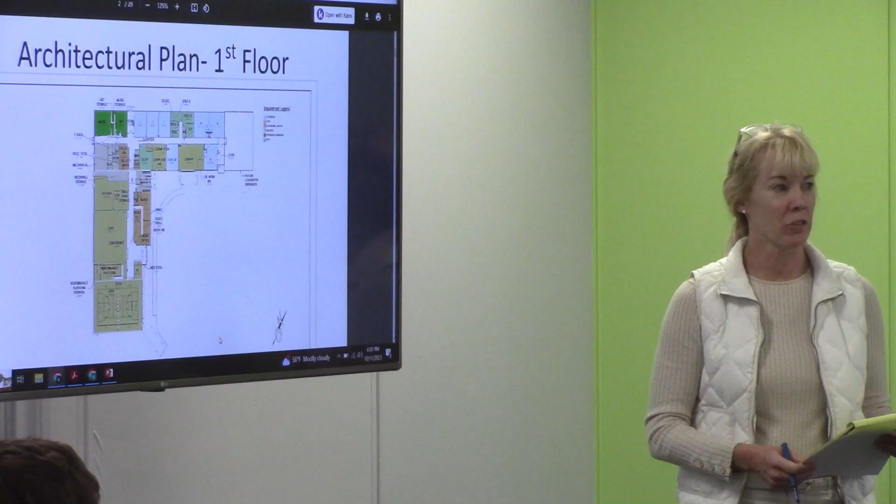Since we last met last month, we've had several engineering coordination meetings. We've coordinated with Alex and Tighe and Bond on the civil and floor plan. We've actually visited and walked the site. We visited the East Rochester School this afternoon to look at the finishes, since that was your most recent elementary school that you built. We've also had 3 staff review meetings on Thursdays in September, so we've got some valuable input from those.

So Brad's going to walk you through the updates that we've done to the plan since you last saw it. We've been evolving what I'll call the block diagram into a more refined building plan and design, putting some adjustments to things. There's been a little bit of movement in terms of the organization of the rooms downstairs, but otherwise the general organization of the building hasn't changed in the last month.

We've been keeping true to the common spaces with the gym, cafeteria, kitchen, and administration/nurse in the front area, sort of the after hours area, and the instructional classroom wing in this area. We did also increase the lobby just a tad to give a little more breathing room outside the cafeteria and gym area. That was one of the comments we heard last time.

Based on some of the stakeholder feedback from the faculty and discussions with the superintendent, we made adjustments by the library, with the sequence of rooms having the flex classroom directly adjacent to the library with a movable panel partition wall. That will lend flexibility to curriculum, with the computer lab directly adjacent to the flex room, creating a lot of opportunity for team learning. That pushed the OT/PT down closer to the corner in the main entrance area. We still have our creative arts wing, first grade and kindergarten on the end, and room for expansion at the far end.

We've also started coordinating the mechanical, electrical, plumbing, and fire protection, because we will need a fire pump. The engineers have confirmed that space is adequate, and it may have a little bit more room to spare, not a lot, but we do need a fire pump room that has a door to the exterior off the back.

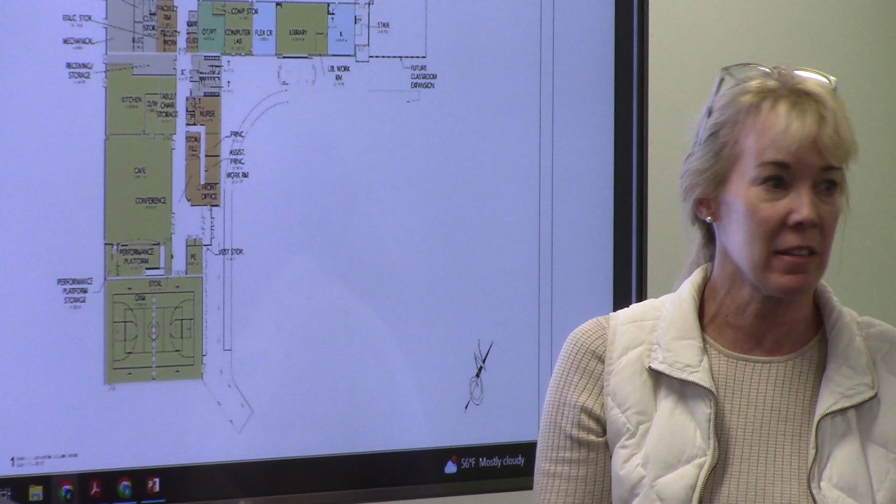Site-wise, when we get to the civil update, you'll see the parent drop-off and the 3 options we have for a nice covered canopy where students will be dropped off, then walk to the main entry or go to the play field right down here. We've also added a placeholder outside the library for an outdoor classroom, to give flexibility for indoor-outdoor use for educational functions.

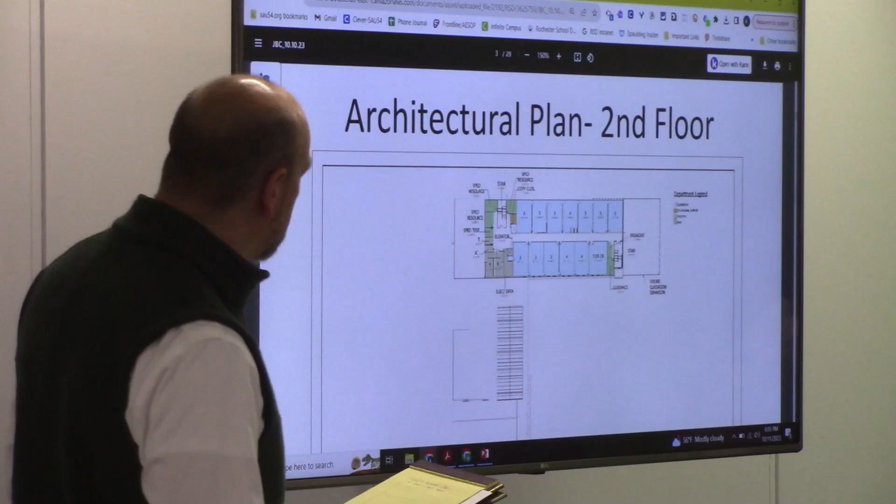The second floor is very similar. Really we're just getting into refinements here, adding more detail to the building and making sure we've got our partitions in the right place, and doors, etc. We've started to show cubbies and some cubby options, which we're going to be talking about in a few minutes. We've also started to highlight some of the exterior window areas and where they might go for daylighting.

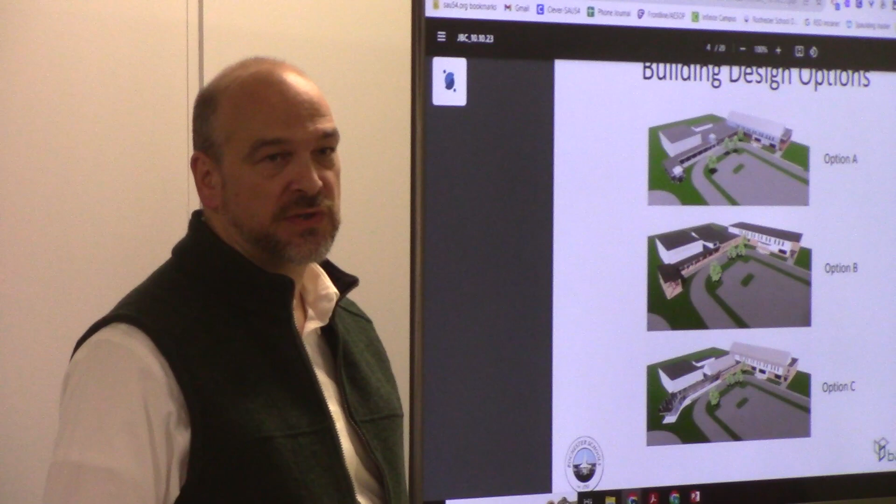So, there are a few options for you to consider for the building exterior appearance. As we turn this diagram into a building and refine it, we wanted to look at the vocabulary of the exterior, look at some different material options, and discuss those with you to get your feedback.

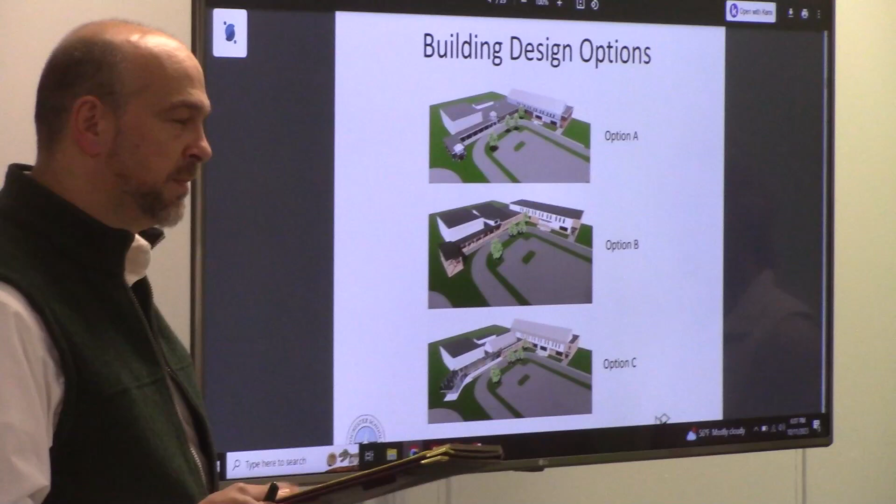We're looking at three options: a traditional one, which is option A at the top; a more timber model pitch type of design, giving a more mountain feel referencing the mountains of New Hampshire architecture; and something more contemporary as option C.

It's important that we've shown you these options to choose from, but tonight we're trying to get a direction from you, because our structural and mechanical engineers need that information to go down one path, so they're not designing three separate buildings. If at all possible, it'd be great to get a preferred direction tonight.

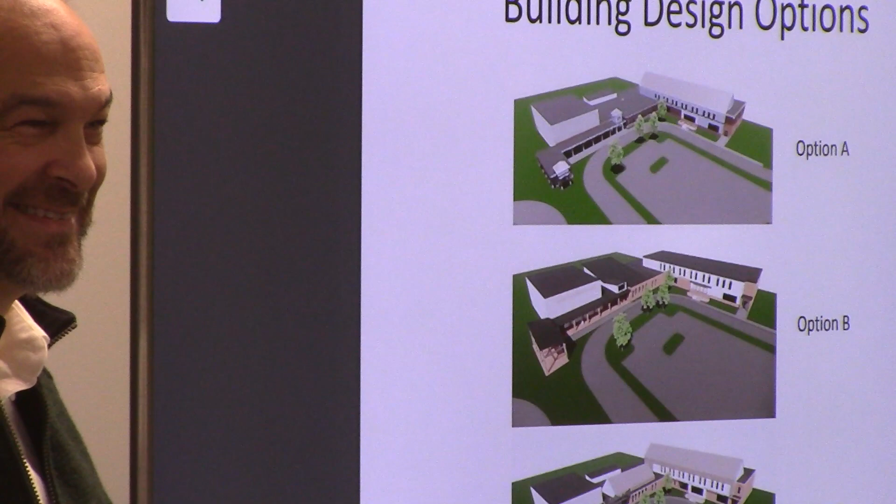And we're going to go through them more. Oh, Mark, go ahead. Yes. Yeah, we have several slides of more information. That was the overview.

Got it. So our option A, as I mentioned before, is a traditional vernacular. I'm just going to read my points, I apologize, but I don't want to miss anything important. It has a traditional New England style school reference, which is the pitched roof over the academic building.

So we have a gable end here. We were thinking that to accommodate mechanical systems, we can cut out on the backside, where you wouldn't see it, of this pitched roof to place equipment. So it sort of acts like a mansard roof or a screen, but at the same time gives that more traditional reference of a New England style building.

We're also showing, and we'll show a little later on, that there's some traditional break to this gable roof. The paneling on the side of the building is a robust, resilient metal paneling, but it has a clapboard profile to give a nice reference to something more traditional.

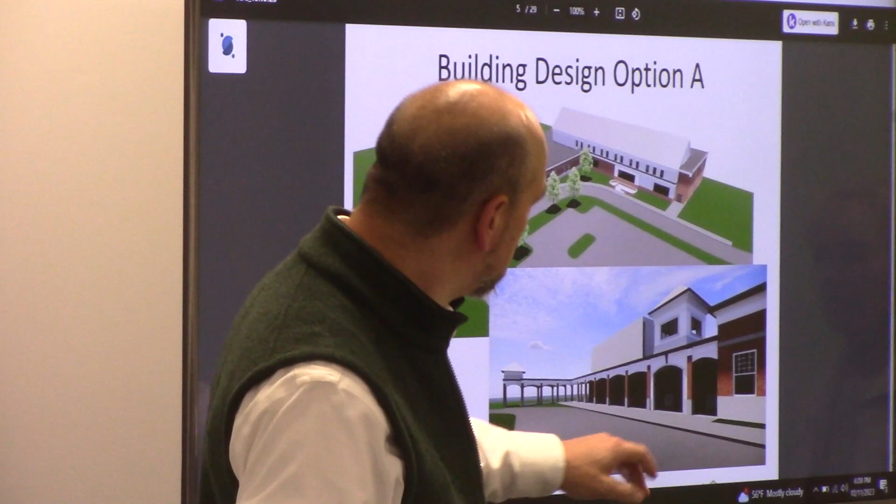Corbel brick bands down at the brick area of the building. We have precast concrete bands going across over the windows, and ground-faced CMU concrete masonry units, which have a very nice look. They're not just painted CMU like you see on the wall behind you, but have a nice ground-faced look, and they come in many different colors. A nice way to break up a building.

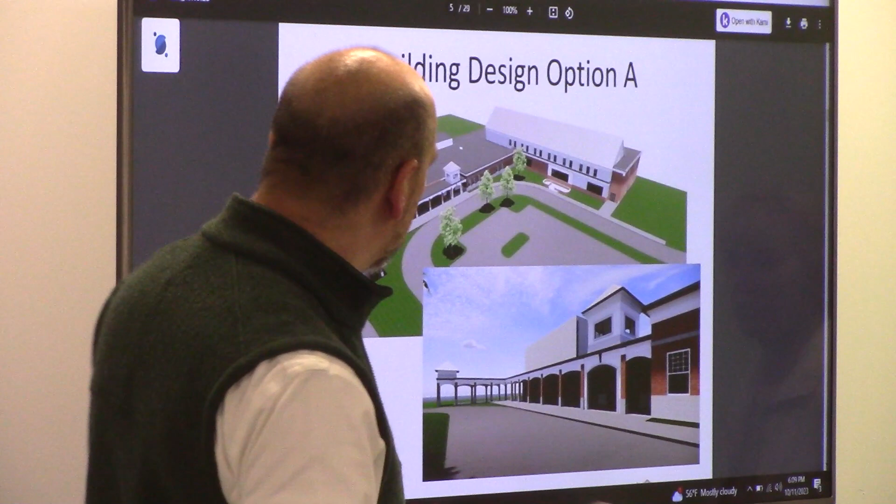We take that up to the window height. A very traditional type of double-hung window with grills at the top to break it up, and a colonnade at the front entrance, which is also very traditional. We have cupolas that signify the end of the canopy, sort of like the gateway to the school, and then a larger one that is very intuitive in signifying the entrance to the building.

These can be played around with and refined, but we wanted to try to get a general vocabulary together - a nice arched colonnade type of look with some brick piers and accents. If we go to the next slide, we'll go a little more into this option.

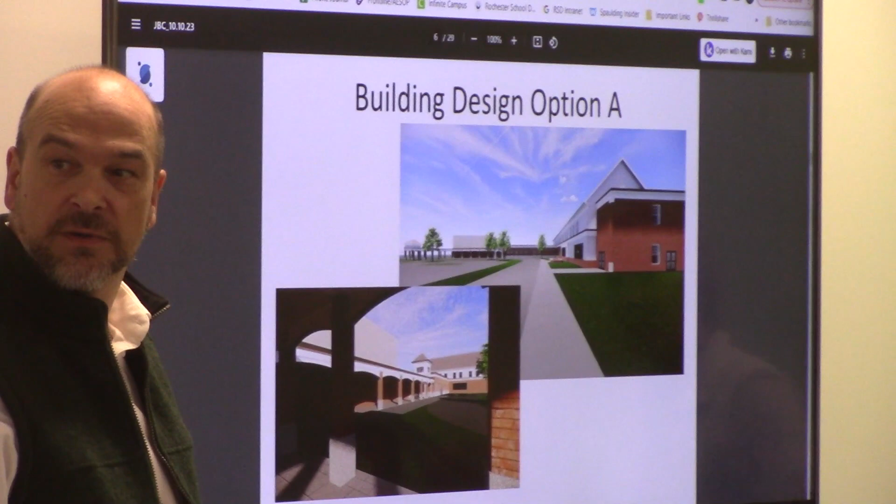Dave, could you go to the next slide for us? Yep, oh he's there, that is the next slide. There we go, sorry. So this was the end of that gable of the academic building we were talking about. The library's here, or classroom. This is the entrance with the canopy beyond. And then we're seeing a close-up here of the canopy with the colonnade, which I think is a very nice traditional approach to the building.

We're looking at a base here, which we recommend be brick where it's touching pavement, with a granite base because it's very resilient to salt. The CMU doesn't do quite as good a job, and the brick really gets deteriorated by the modern salts we use on sidewalks and roads. So that's what we're seeing here for the culinary area, but we wouldn't want to use that everywhere since it gets a little expensive.

And then the next slide, option B.

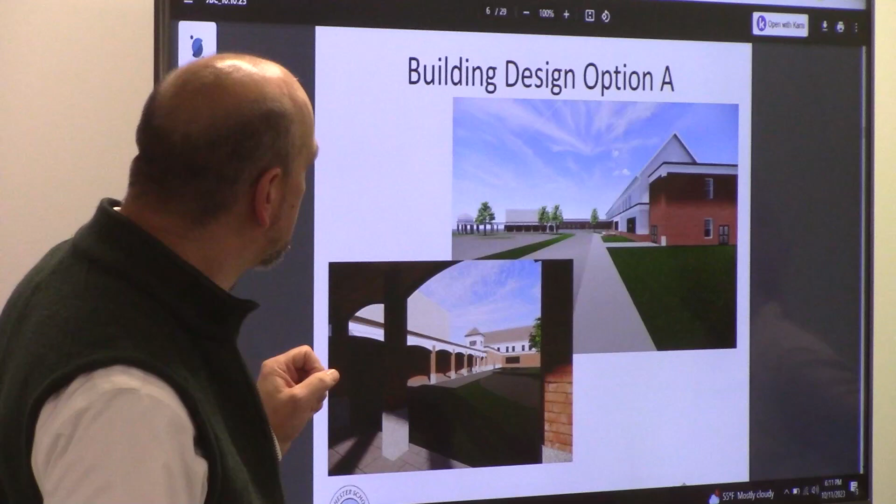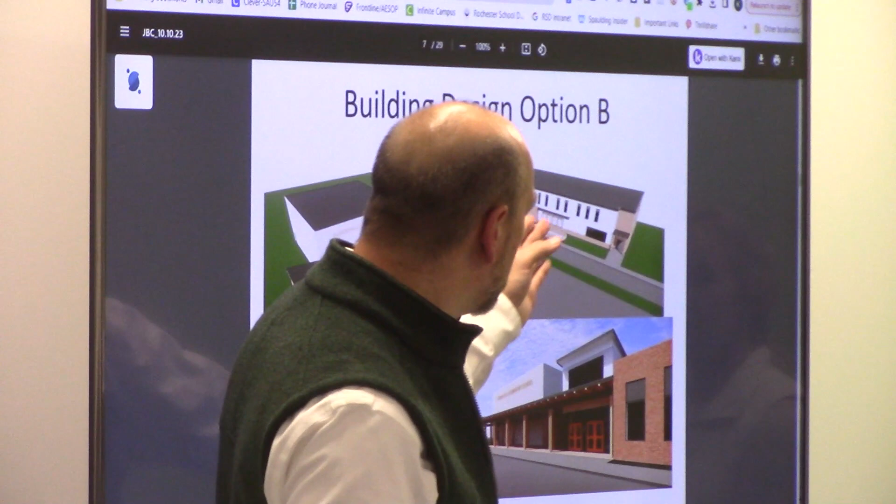Flat roof over the academic wing, so very different from our traditional look in option A. But still we're keeping some of these important elements that we talked about. All of these options have the same academic offerings and the same layout internally, so there's no real difference in that regard.

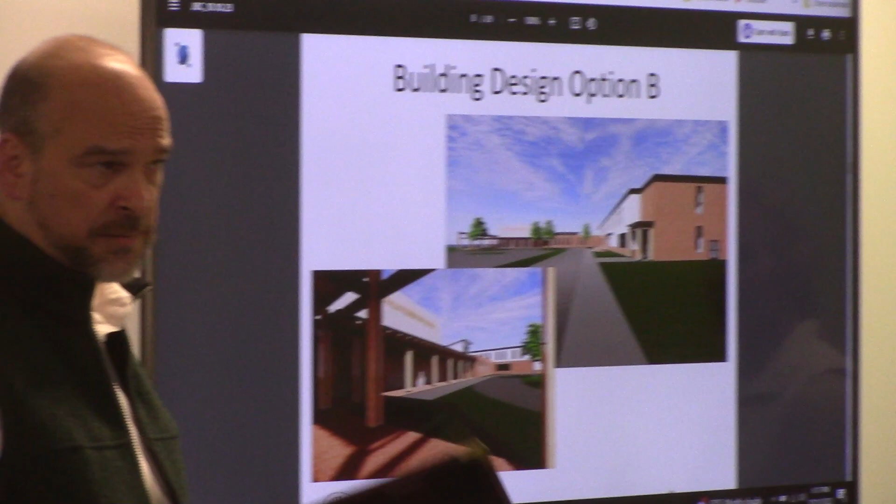So this is the look from the end of the building. You can see we've changed over from this gable roof to sort of a strong cornice look at the flat roof. And again, at the entrance with the timber columns, which require more maintenance. They're a warmer look, they can be a little more friendly with the natural woods, but at the same time, operationally, they can be a little more expensive on maintenance.

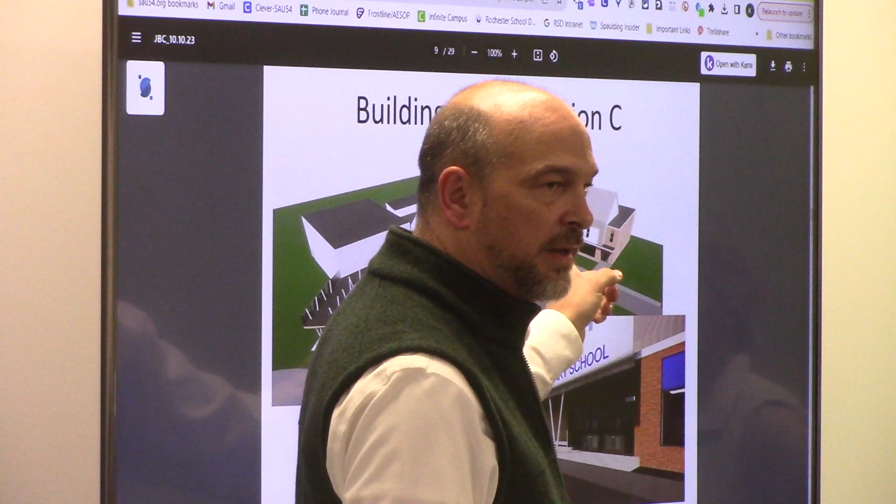Which you see some of in recent architectural design work, framing a clapboard profile metal panel system with opportunities for different colored metal panel clerestory fields above the window. So this is not transparent, it's just a different color. We can play with the colors, as in an elementary school, so it's just a fun little thing to do, but still modern lines. You can see there's still some flat roof accenting around here, and a gable roof over the administration area to kind of break up that form and make it a little more friendly.

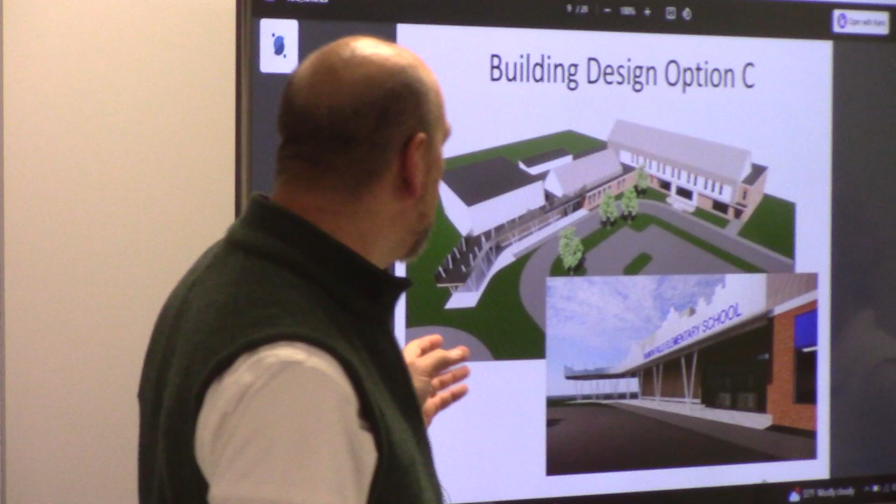Obviously the canopy really stands out. It's quite provocative with angled columns, which actually has a Nordic or Finnish reference, with a metal screen over the front of the canopy. It's a bent metal screen which is translucent and perforated, so you're actually looking through that.

Let's see what I missed here. And that's pretty much it. Oh, thanks very much, Steve. And the last slide.

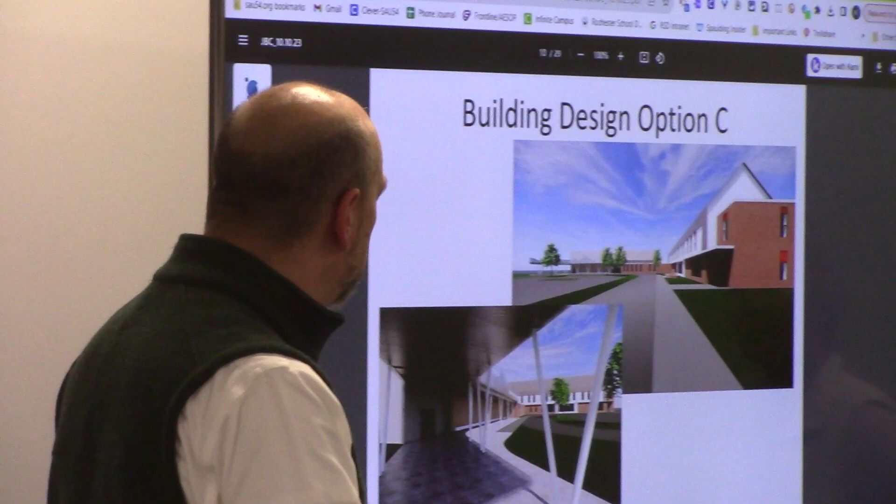Those could be changed up for a slightly more modern look, with more sleek profiles with the gable instead of traditional option A profiles. Then the colonnade is, again, very sleek looking.

We also have a stamped concrete brick patterning to the sidewalk. Wanted to try to play with it a little bit, give it a river look. It's hard to see these renderings.

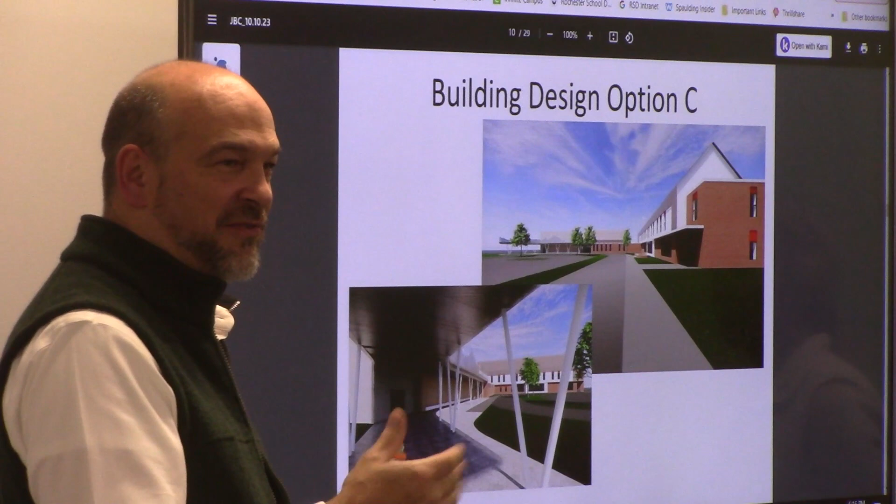Again, hard to see in the renderings, but easier to see in floor plans. We also ribboned the wall next to the walkway to reinforce the fluidity concept, Salmon Falls Road, kind of playing with that concept a little bit with a river or a stream and so forth. So the wall here actually undulates next to the walkway.

It's wood paneled right now, shown as a wood panel, but it could be multiple materials, with a bench seat in front of it. So someplace away from mom and dad, where you can actually sit down and take cover from the weather. And I think that's our last option slide.

So why don't we break there and just get some comments on, Paul? Nice job.

Couple quick things specifically for Mr. Toddy and you guys. Mr. Toddy, with the pitch of the roof in option B, do you have any concerns about that with water runoff and snow? No, I don't. The water's going to shed and we'll control that as it does, anticipated however you see fit.

And then the question for you guys is the wood timbers are very nice. Have you done that in another school? Any idea what the cost of maintenance would be on something like that? What type of wood would you think about using?

We've done it on several projects. It works best if you stain it rather than paint it. Fir is a nice, warm, beautiful wood that we like to see. It's structurally very strong, it's warm, but we could do several different mock-ups and look at the different opportunities.

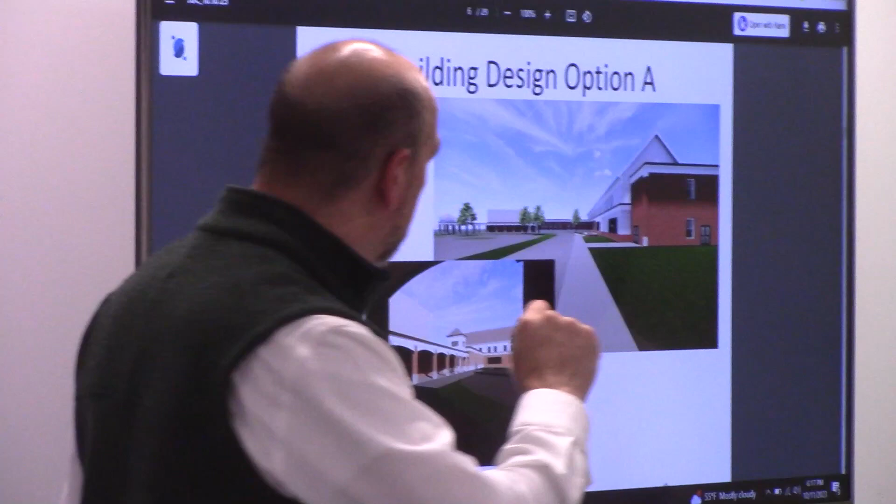And this is the perfect slide, actually, the next one. This roof here actually doesn't extend to the far side of the facade. Sorry, I was actually talking about where the kids walk, the pitch roof where the kids... but yeah.

There's a pretty wide green strip here, so we'd have a drip strip. I was more worried about the snow and water coming off the canopy, and specifically in design, the canopy would have an internal drain, as long as there's a mechanism where the snow and water was not beating against the brick or concrete.

Okay, thank you, Ingrid, sorry.

Tim? Sure, so just for practicality, is there much of a cost difference between any of the options, in building costs and then in maintenance costs? So the flat roof option, I don't know if we can go back to the slide that has all three. The flat roof option is the most conservative in terms of cost.

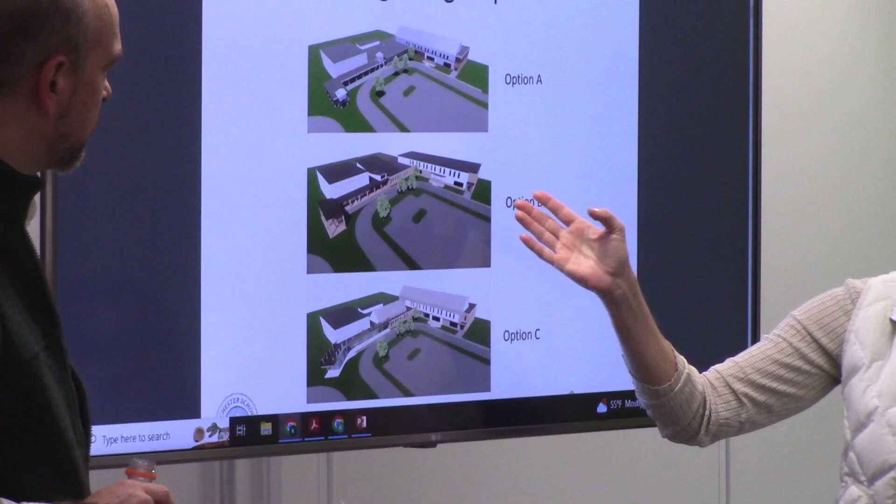And that is this one. I mean, we could go even more conservative and not have this and this, and make it all flat. That's the cheapest. You're going to have a mass for the gym anyway, to do a little bit for the cafeteria.

I mean, Harvey is here tonight. They're the construction manager and they'll be pricing this, and that will be part of why we stop in November with a design, so that they can price it up to make sure we're okay. Because if we're not okay in terms of the price, then we get to go back and change and tweak it so that we are on budget.

I would say this probably is the most expensive, just because there's a lot going on. It's not as traditional, you have more masses here. This one's kind of not too cheap, not too expensive, but right in the middle. But that being said, we can take elements from each of the designs, and if you like one thing here and this, we can come back and show a fourth option.

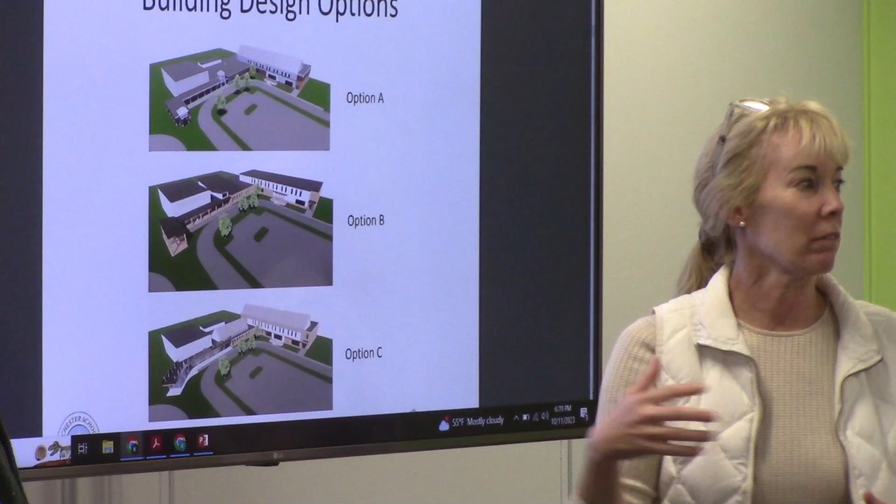And for maintenance, ongoing, 10, 15, 20 years down the road, roofs, et cetera, is there one that has a longer life?

Well, your flat membrane roof, your black roof that you see everywhere, right? The single ply, that's a 20-year roof system. Unless you want to spend a little more money and get a 30-year warranty, but frankly, the difference between a 20 and a 30-year is the piece of paper warranty that you get. The product isn't that different. Generally speaking, it's a 20-year.

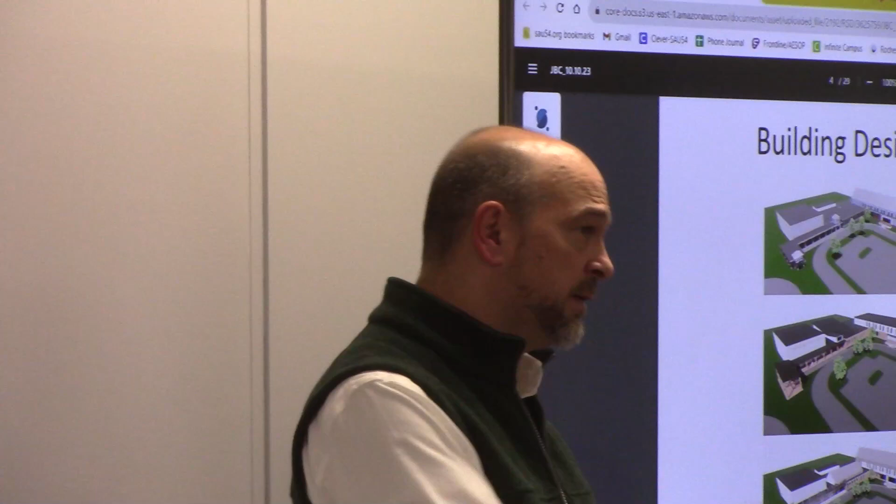Your metal roof system is a 40-year roof system. It's not necessarily the warranty, but that's what they're telling the life of the roof really is. I think there's a lot of truth behind that. Sometimes these roofs can need a little work, but it's gonna hold up a long time if you maintain it well, metal roof system.

And besides the roofs, are there any other material or design differences that cause more maintenance? Sure, so your brick, your masonries, they're gonna hold up really, really well. The granites are gonna hold up really, really well. We're talking about metal panel systems with a 22 gauge metal siding, and that's a very robust system. If you're not throwing rocks at it, it's gonna do really well. And this is a type of location that holds up quite well.

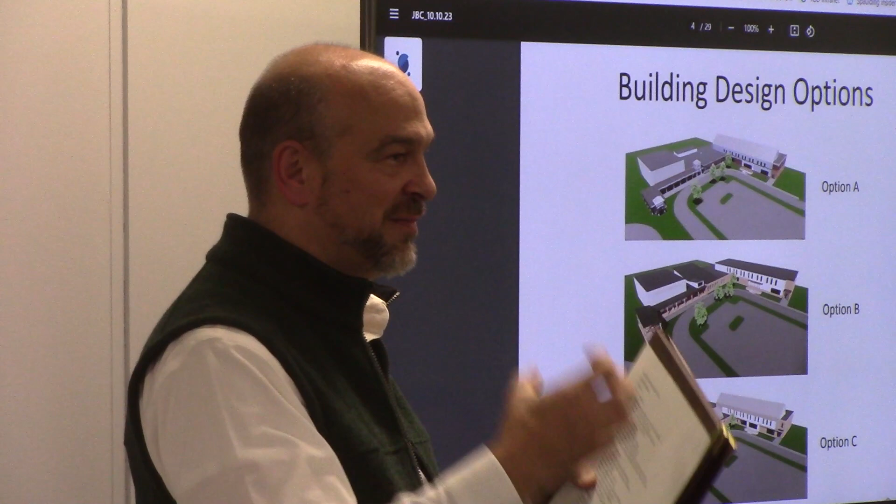The timber, on the other hand, is kind of a weak point. It needs more maintenance than the other items. Also, if you look at this third option with the metal columns hitting the ground, that's a weak point. This is a conceptual design, we would want to design in a base to that so that the column isn't actually hitting the ground. It's probably going to sit on a plinth or a column base that can resist some of the corrosive salts and so forth. So those are weak points in certain designs versus others.

But all three of these are commercial designs of their own, intended for institutional use.

Alex? I noticed that you said on option A that having the granite at the bottom of the posts helps with the harsh snow melt, which can be a problem for the brick. But on option B, the walkway looks like brick - would we have issues with snow melt on that brick walkway and on the timber? So the walkway is actually a brick walkway? You're talking about the walking surface itself? Yeah, but that's actually a precast concrete paver that looks like brick. Okay, so it's actually intended for that use. Great question.

Paul? As much as I enjoy the gable idea, I think it's very attractive. Is there a benefit to limiting the equipment exposure for us? Because we'd be sacrificing solar space, where we could put panels, to hide equipment instead. I'm just trying to understand the value there. Does that make sense? Is there a benefit to enclosing mechanical systems?

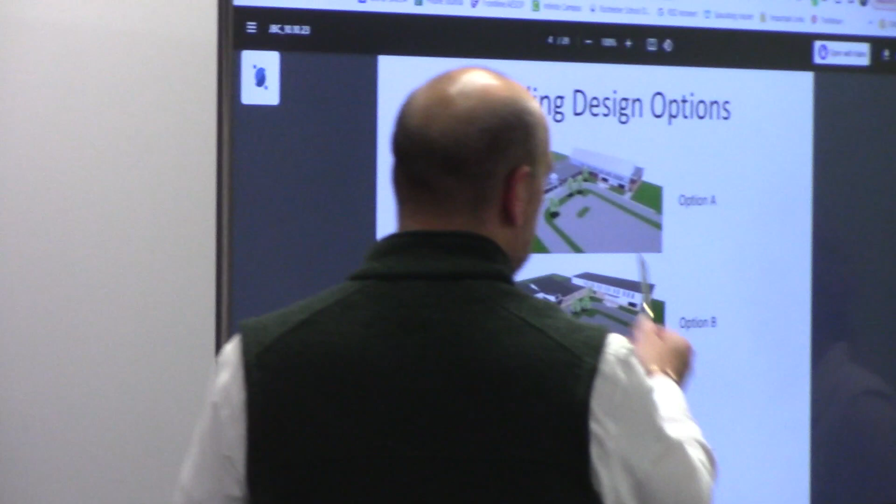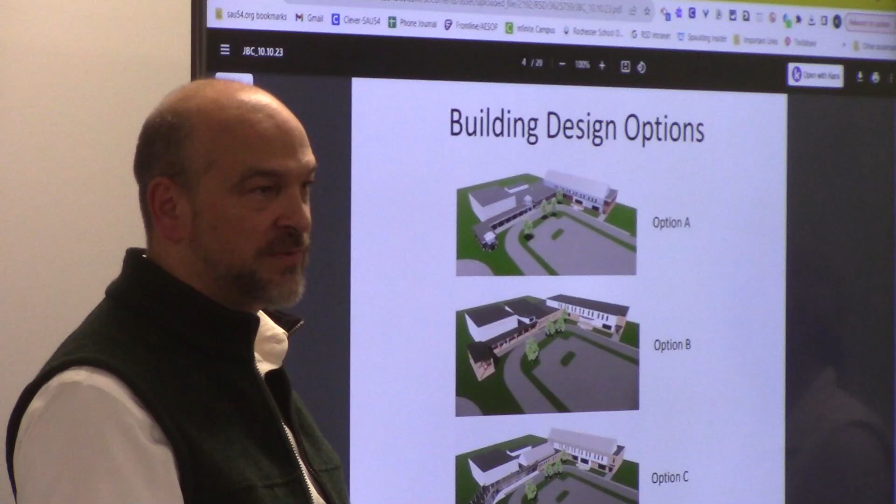In my personal opinion, this is a great opportunity for solar, actually having a pitched roof - it's a great orientation, almost southeast exposure. You have to be careful about where all the vents and mechanical systems come through the roof, but if this roof acts as a screen for that, it's actually creating a substructure for your solar system, pitched at the right angle for a solar array. Standing seam metal roofs on top of that are the perfect mounting system - they've kind of created a mounting system to clamp to, using the standing seam to clamp the panels or rails for the panels.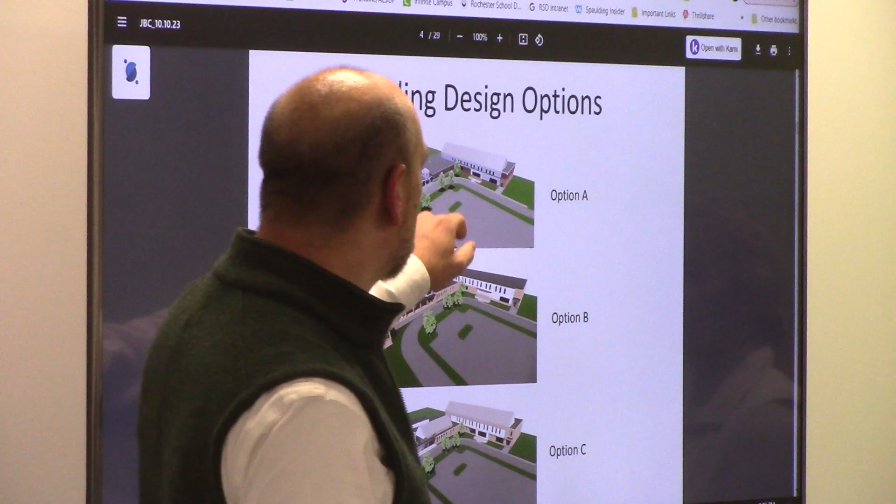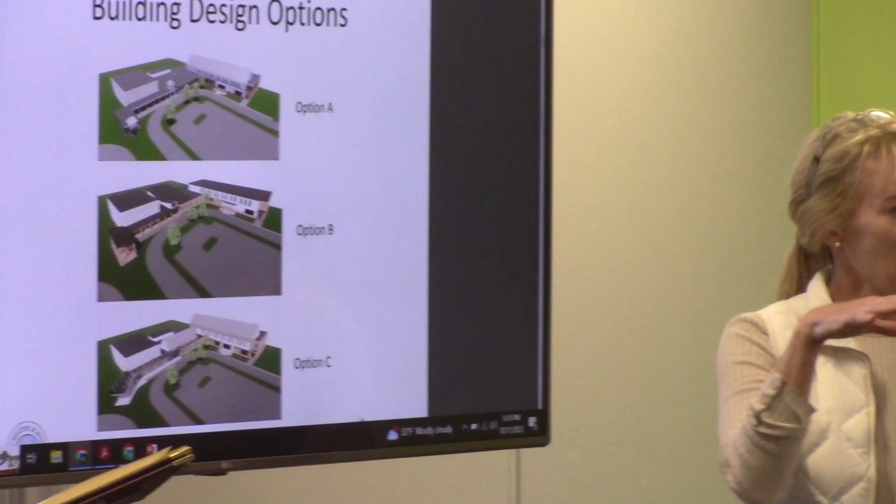We also have solar opportunities on the larger flat roofs, especially the gym, because there's no piping coming through that roof, no plumbing, not many penetrations. So we can look at solar opportunities at the gym as well as the academic wing. And Dave, earlier today we met with the engineers and had a fantastic idea for the canopy in front that the kids see - to actually make that PV, rather than build up that structure, like some covered car parks you see, do that for the canopy. So depending on which option you choose, we can further leverage those opportunities within the design.

So I really like option A for several reasons. The cupolas tie in with Salmon Falls Road, with the farms and the country road feel. I also like the aesthetics, but more importantly, on the right side of the building, having all the maintenance enclosed is respectful to our abutters who are right on that side. The more we can minimize the sound and the looks for them, being in their backyards, those things really stand out to me.

Matt? As much as Paul's not gonna like me saying this, I like option A too. I think it's a classic look. I love that tower - it draws your attention, and that's where the kids' drop-off and pickup is after school. For the same reasons I like the roofline, and I was thinking the solar panels - that's definitely a southern facing roof, so that would be perfect for solar as well. And for the noise for our neighbors, I think it's perfect.

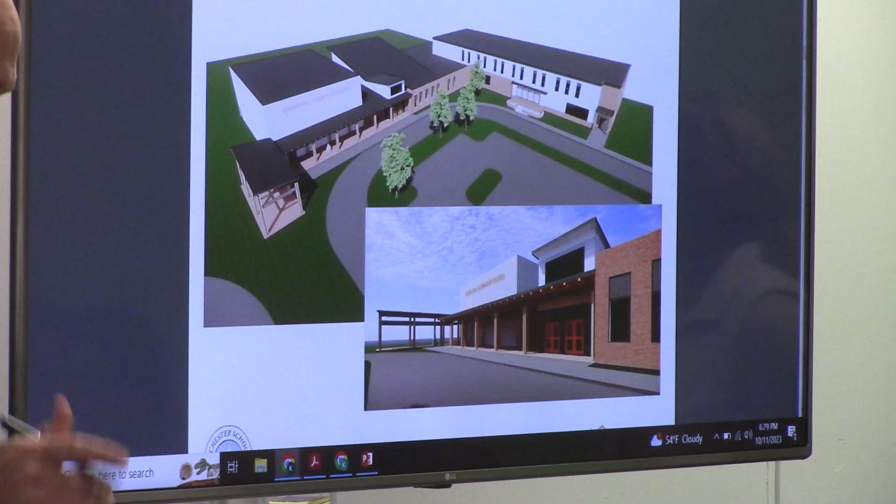And on option A, I guess my question is, what does it do on option A? Is it similar, or is it just flat? Oh, no, this is a flat roof, so it's got internal drains. And if we wanted to, could we have some sort of a facade on the roof to make it look higher? Yes, a parapet. Yes, what have you? Right, good.

Okay, Paul? I am in absolute opposition of the little pointing towers, and less in favor of the idea of putting it into the walkway. If you think about what we did at the middle school, when we had those situations, they just had points for contention and leaks. It's not functional. So you're doing it for aesthetical reasons, I understand.

I think the visual in option A is nice. I would like to see something where we put the wood on the granite, I like the wood to warm it up. The river ball thing sounds brilliant, I love that you can tie those two together. I personally like C the best, but I'm a more contemporary kind of guy. I get why that's not a draw for educators, but the cupolas, to me you're just adding things that we have to take care of later for a visual that's not going to be long-term driven. It's just not, I don't see value in that.

Matt? So I do also like option C out of this. The contemporary feel is better, in my opinion. There's, to me, more of a timeless look of this school. It also goes with more of a tech-centered, one-to-one district that we are. The problem I do have with the cupolas is, number one, I just think of Tri-City Plaza, I think of a mall, I don't think of an education space. And it gives me a Garrison City feel, which we're not over, so I'm not going there.

We were just trying to give you different options. I'm a fan of stamped concrete, so you can make it look however you want, and it's good and durable.

I think the way this was drawn, it doesn't corner us into any decision. It's really up to you. The way it was drawn is a more traditional sidewalk. It looks like there might be some stamped concrete patterns in it, but you could go with a regular concrete sidewalk. It's really the owner's choice.

I like A for the reason that others have described already. I think it fits in with that neighborhood.

What's your take on the argument that the cupolas will leak? Have you seen that in the buildings that you put them into? So these cupolas are actually outside. If it's built right, they shouldn't leak.

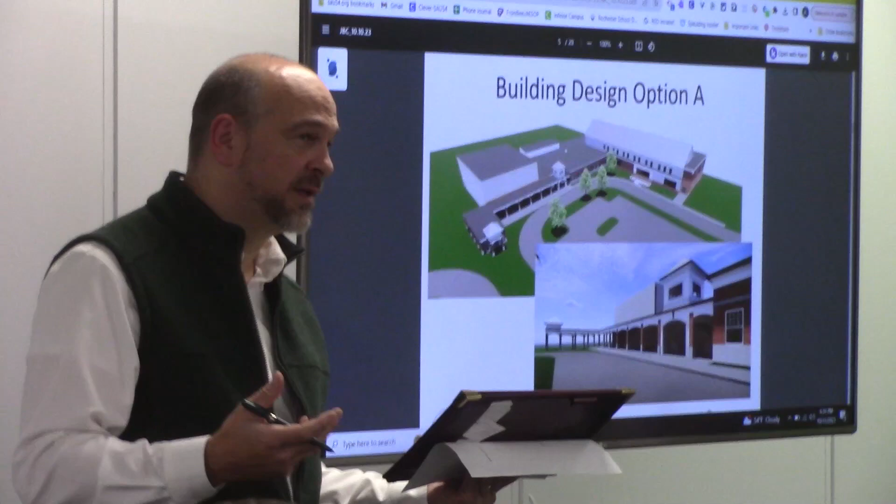Our vision for the cupolas is that it's kind of identification with the main entrances. It's trying to fit in with the concept of the metal panel roof, which is supposed to be an homage to the New England barn, the New England house sort of thing. We can very much go in that direction with these cupolas too.

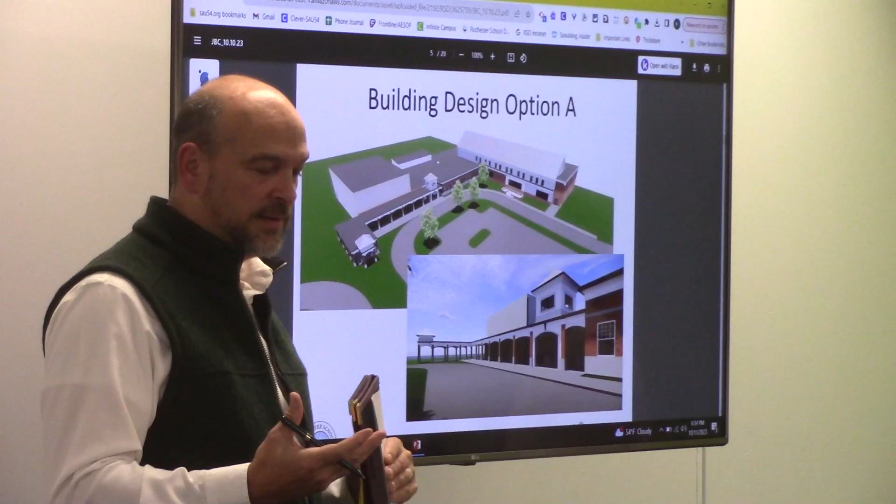So the cupola roof, there's no reason why it should leak. The paneling on the sides, we were envisioning a fiber cement metal panel system. It's not something that's wood and porous per se, but something that would be a little more resilient, though we could still apply some character to it with moldings and so forth.

We have not put any skylights in the building because we've designed it so it can be daylit from both sides, so you don't have internal spaces without light. We put toilet rooms and things like that in the corners. Skylights are something we typically try to encourage, but we know eventually they do leak.

So I think we're okay, but I'm hearing we may need to study this a bit more, these canopies and these elements, to maybe make them a little more modern, but still respect the farmhouse feel, the neighbors, the sound, and the mechanicals.

If this is the direction we're going, my pet peeve is when you go to any commercial zone and they have this type of cupola, you look up and you've got cobwebs, there's a pigeon in there, and all this other random stuff happens. Some kid flings something that gets stuck up there, and they're laughing every day they come in. What do we need?

Maybe metal screening that you can put in to keep bees and birds out, and stuff like that from happening. There's a lot of maintenance in that high-up space. That's a staff injury situation unless we need more boom lifts. We have one. I said more.

It's a really good point, and there's some subplot things to talk about. I do a lot of building assessments for schools, and where the repointing of the brick has to happen more often is always down low next to the pavement. It's kind of a pet peeve of mine - English is probably tired of hearing me say it at this point.

Also, the cost of masons isn't cheap, so we try to spend that money where it does us the most good. The ground-faced CMU for the wainscot means less joints, less units - I see some nodding over here - so less labor, so less money. We try to put the money where you're going to get the biggest bang for your buck.

That's kind of why you're seeing these accents. You're seeing the precast concrete here, a little more money - probably on par with the brick. I don't want to put you on the spot, but we think we're in that neighborhood. It gives a nice accent where we're going to see it most - we're not going to do it everywhere, but in the upfront portions where it's really prominent.

As I'm trying to listen to you all, I'm getting a sense that everybody likes - we're getting a consensus of A. But do I get a consensus of A without the gazebos? Does that take care of both, without the cupolas? Yeah, I think that's going to be a debate back and forth for a while. Okay, so we're not going to solve that right now.

All right, so we have some classroom layouts to look at. We also have some cafeteria tables, so I know we're 45 minutes already, so I'm not going to read all of these. They're in your handouts, but this is kind of our dream futuristic classroom that we've developed. So it has biophilic design, it has technology, flexible learning environments, healthy learning environments for the different types of materials.

As well as environmental controls for the classroom. So all of these things are in our minds architecturally as well as with our engineers as we're moving forward. And the next slide. So we've been looking at the classroom layouts and trying to refine the inside of the building and the guts of the building. So we're getting into this layer now.

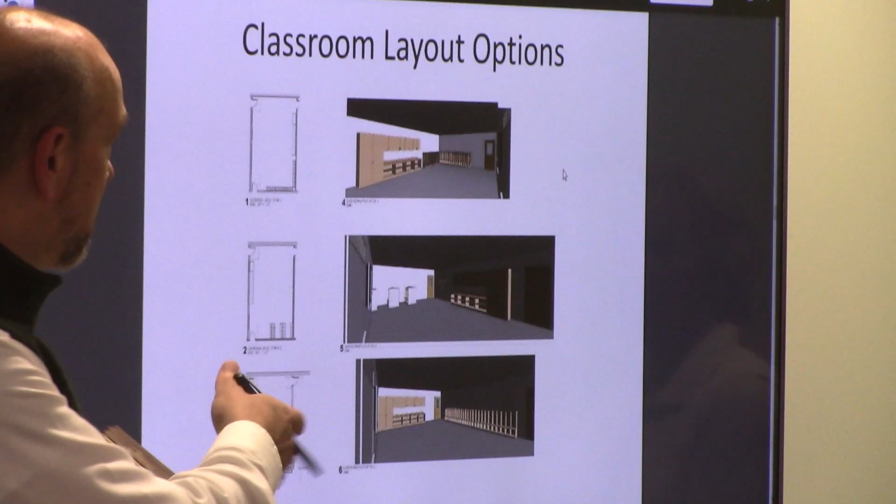Today we had a wonderful tour of the East Rochester School, your most recent school, and a terrific conversation with the principal over there about what she likes and doesn't like about the building. So we've learned some things since we put this slide presentation together, but what we brought to you was our thinking yesterday, and we had a few options. Now we have a fourth option to discuss, which is what we learned today.

So this is just the intro slide. The next slide would be the first option we were looking at, which was every classroom to have essentially a countertop, a 12-foot countertop with what we call a t-shirt wardrobe. This can be just storage with shelves, or half of it's shelves and half of it's a hanger. And then over cabinets from 12 feet.

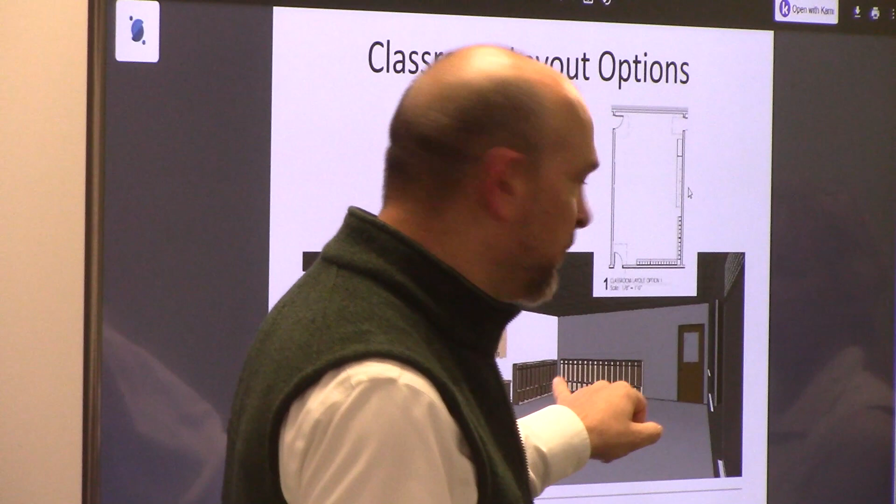And then we're shooting for 25 student capacity per classroom. That's your maximum capacity in the classroom. So we're shooting for 25 cubbies, so that we can accommodate the largest number of students that might be in there.

We've looked at all of your schools. We've been in all the school buildings. A lot of the schools have the hooks or the cubbies in the classroom. East Rochester does not. But talking about them in the classroom for the moment.

This design has it so that when you walk in the door of the classroom, the cubbies basically are along this wall, the corridor wall as it were, and then it wraps the corner here, the idea being that they come in and they're changing their boots into their shoes and they're taking their coats off, and this is kind of the changing area or zone in the classroom, and then they're walking through their academic experience.

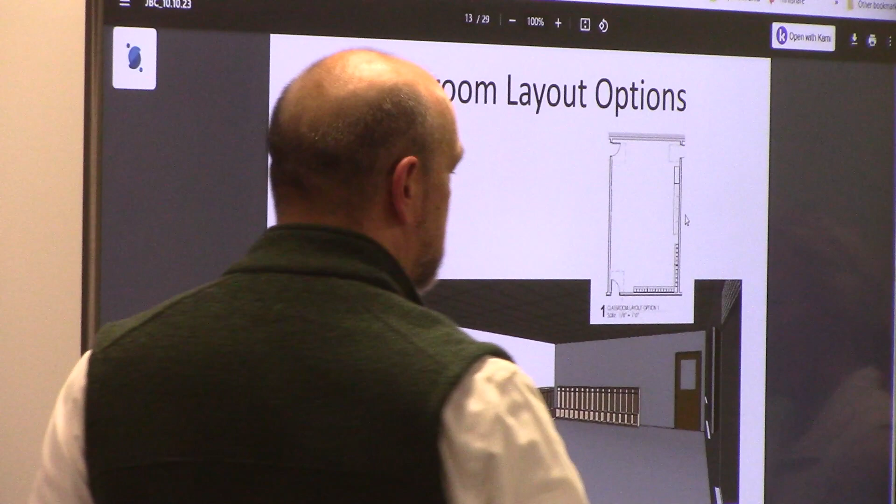The next slide, I'm going to go through these and we can go back. You're coming into the classroom, but it's sort of a corral arrangement where you have these aisles of cubbies. And by the way, we've done schools with all three of these options, so we don't have a favorite. It's really about how you guys want to work through the school day with the children.

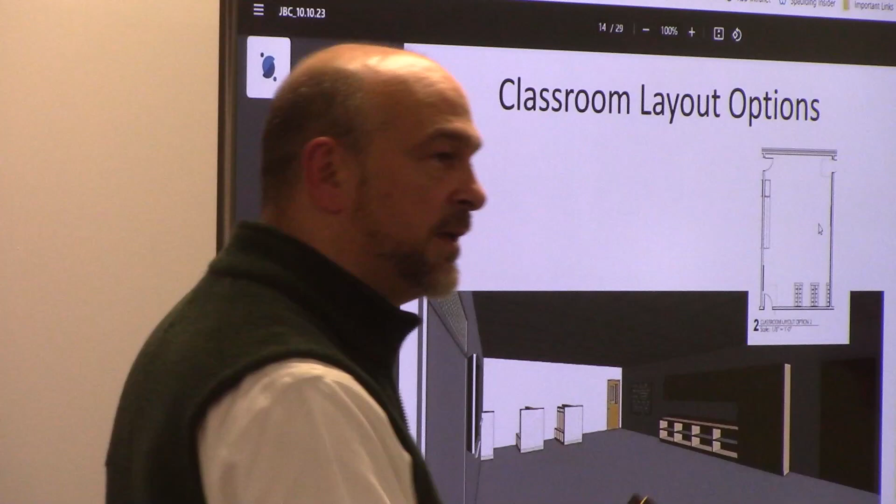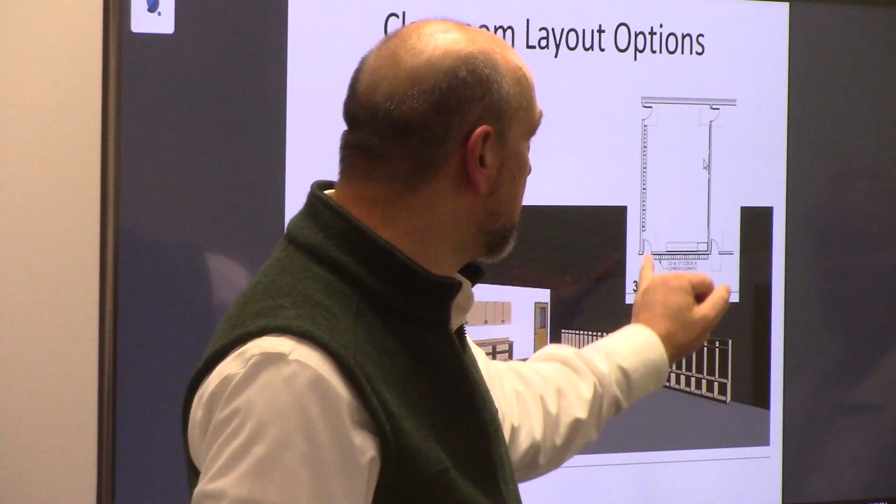But it's sort of a half-height wall here with aisles for the cubbies, and then the same amount of cabinets and wardrobe along one side with the visual display, the marker boards and so forth, or the instructional wall being on the opposite side. The third option is you come into the classroom, you still have the display or instructional wall on the opposite side of the door, but your zone for changing from your coats and your boots are all along the opposite wall. And your counters and your wardrobe are on the corridor, opposite corridor.

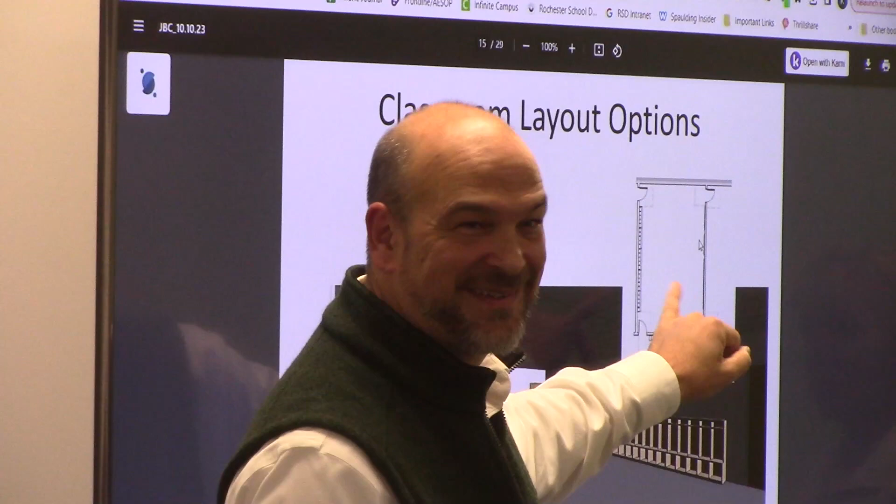So right as you walk in, which is the way that it looks in East Rochester, they've got all of their millwork right up against that corridor wall. But in East Rochester, the cubbies, of course, are not in the classroom. They're in the corridor, and they really like it. They like it a lot.

Next down the corridor a little bit, you've got 6 feet of clearance between those cubbies walking down that corridor. But they say they're very comfortable with it. It works for them. They have fewer classrooms per corridor than your new school does, so we have to keep that in mind as there's more students traveling through this school.

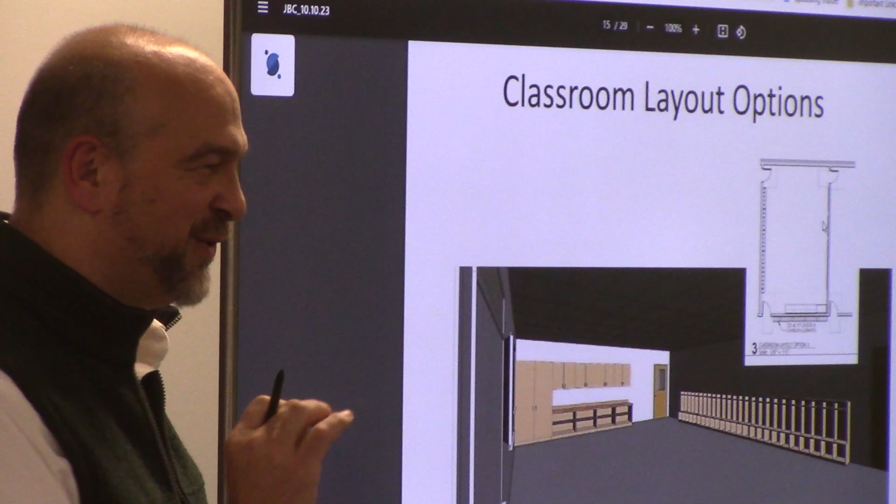But they're very comfortable with it. So their preference is actually to have the cubbies in the corridor for a few reasons. It was really interesting to hear the principal talk. One was, I never would have thought of this, but when Jenny gets out of mom and dad's car and her clothes smell like cigarette smoke, and they put it on the hook in the corridor, not in the classroom, they don't smell it at all, which was kind of interesting.

The other one is if Joey has a disciplinary problem and he needs to go home, the principal can go get his things and never disturbs the class. So everything stays outside the classroom. Was there another reason? No. So those were pretty enlightening preferences that we heard.

So we're kind of looking for some direction as to which way you'd like us to organize this feature. Matt and then Paul. I'm glad you heard from the teachers, because that was my concern. I mean, we can sit here all day and talk about it, but we're not the ones teaching in the elementary classroom and whatnot. So I'm glad to hear what their preference is, at least the principal and whatnot.

I guess the way I look at it is if it's in the classroom, it takes up space, whether it's the corrals or whether it's the long line of them. That does take up space in the classroom that could be used for something else, some other instructional purpose. So I would be leaning towards having it in the hallway myself.

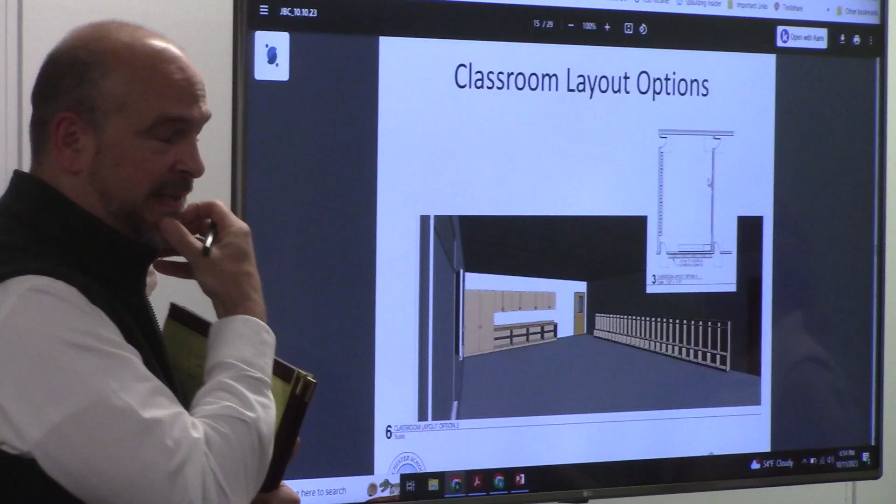I don't want to cut anybody off from the cubby discussion. There's a second half of this, which is the casework inside itself. At East Rochester, we were talking to the principal about the casework, and it was interesting to hear her say that there's never enough storage. So we would put 30 linear feet of storage in here, and it still wouldn't be enough. There's just never enough, right?

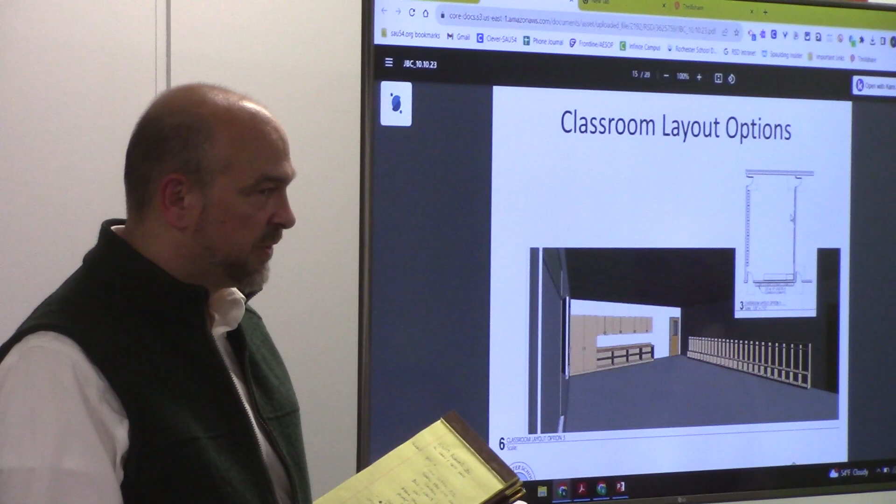Traditionally, we're used to doing most of our schools with a 12-foot counter, 12 linear feet of counter with over cabinets like this, with a wardrobe that's 4 feet wide, so two 2-foot doors. In East Rochester, you've got probably about 18 feet of cabinet work, which is quite a bit and can get kind of expensive. The arrangement is very similar to this, the only difference really being that the wardrobe looks like a 3-foot wardrobe instead of a 4. Otherwise the overall length is a good 6 feet longer, or 50% bigger than what we're used to putting in.

So we are kind of wondering if you want to go in that direction, or you'd like to stick to something more.

Matt, go ahead. Mr. Toddy, do we have a concern with the floor, where we go underneath these, do we want to spec out when the floor goes up to it? Yeah, I would think the floor would just need to go up to it. I wouldn't worry too much about putting it underneath.

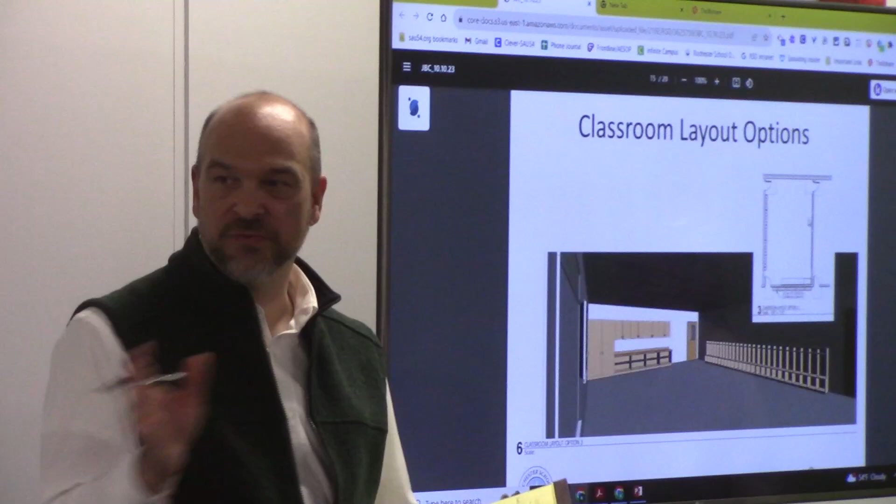I also wouldn't worry about the built-ins too much. The classrooms at East Rochester are a little oversized. I think these rooms are a little smaller than those. Your East Rochester rooms are running about 925, 924 square feet. We sized these, I won't say lean, I'd say compliant - we didn't oversize this building, so it's right-sized, about 905 right now. That 20 square feet can mean something when you start getting into these kinds of discussions.

So what we did at East Rochester is we had the built-ins, which we've all agreed is never enough. So in the furniture lines, which are owner's costs, we put shelving, closed doors with locks on wheels - at least 2 per classroom. Those are very moveable, so we can add or move storage without having to have the built-ins. You can get much cheaper storage through those types of armoires on wheels, I guess you'd call them.

I would be more in favor of sticking with the design and adding another cabinet, not a wardrobe, but a similar size cabinet with all shelving inside. If we're gonna do this, keep the aesthetics similar, and no teacher would argue against having another cabinet. Matt, do you agree? I definitely agree with that.

I don't know if you have a similar layout in your classroom. I work in a building less than 2 years old, and I have 3 of those tall cabinets, all about 2 feet wide. I only bring 1 coat to school, so having 2 feet for 1 coat is a lot of wasted space. If there's a way to make that smaller with more shelf space, that would be more practical for a teacher.

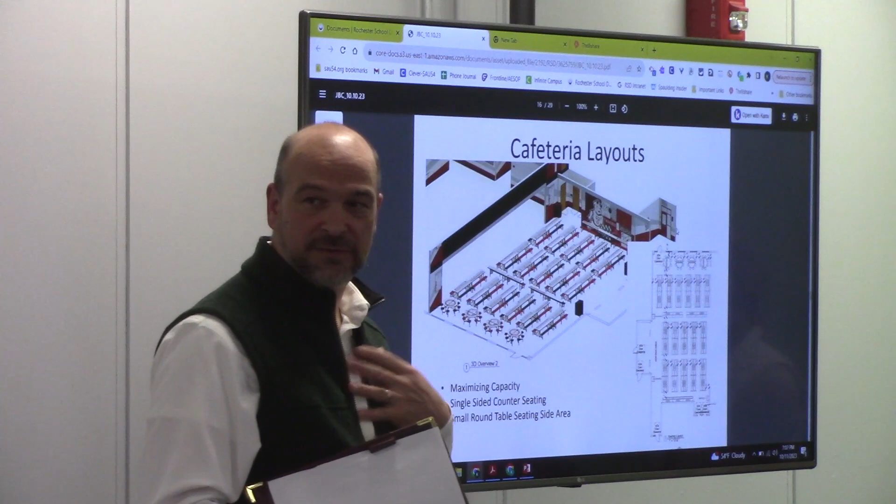We brought along a few examples of different cafeteria type arrangements. This is more of a furniture discussion which I'm sure will be ongoing. We understand you guys have a preference for long rectangular tables, a more traditional arrangement, but we brought examples of what's being done out there - these images came from one of the vendors you use, so I'm sure they'll come in to talk more about it. This is a maximum density layout, and with the rectangular tables it does allow for a side area for round, more communal type tables.

This particular one, even though it's an elementary school, it's kind of high schoolish, because it has this counter area where you can sit only on one side, for the kid who doesn't really want to sit with anybody else, which is kind of interesting.

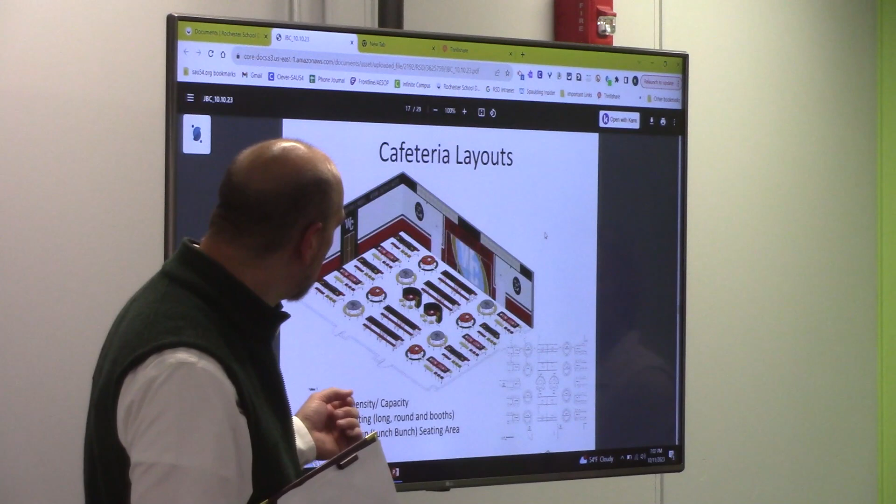The next arrangement is more of a mix. You have these rectangular tables, and even though they're kind of rigid shaped, they're still essentially rectangular tables. They have round, more communal tables breaking it up. And then this is essentially a booth in the center, just a different way to break things out. We're hearing from schools that they'd like to have some options of semi-enclosed spaces.

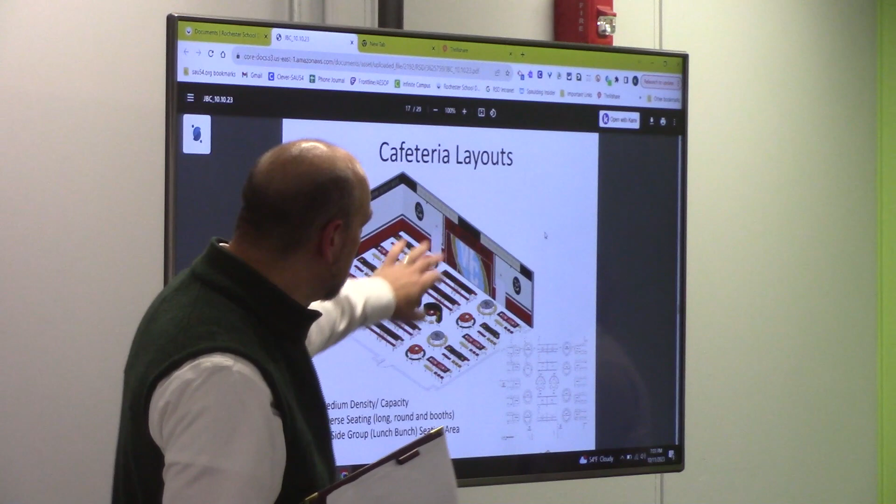Or at least spaces for the students to eat in a more enclosed or side area. One of the schools I work with calls it the lunch bunch, which I just love the term, but it's basically for the kids who need a slightly more intimate environment to eat, instead of a whole separate room that completely segregates them.

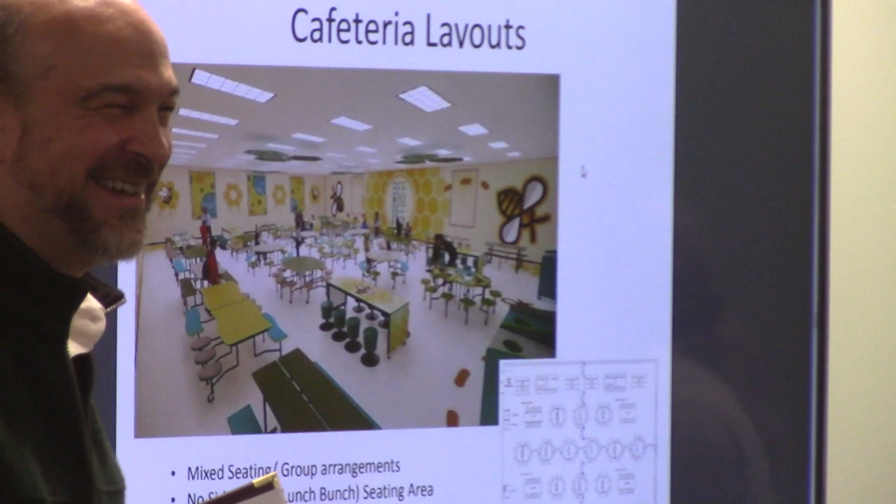And then the last option is really fun, but you can tell this was drawn by a furniture vendor. There's a lot of different types of furniture here, it has everything. So as we continue to push forward looking at the furniture options, we wanted you to start with the gears turning about these things, because we're going to be talking more about furniture as Gordon is engaging with furniture vendors.

Paul: My question is for Mr. Toddy and Mr. Pusey. Looking at the cafeteria layouts, the first one reminds me more of the middle school type setup, and the second one reminds me more of the high school type setup. Could you find out which works better for the staff and students at each, so we understand this before embracing it? I understand why the square tables, that's what we have everywhere, it makes sense. The high school, I don't know how long we've had that furniture there, but it's been a little while. So can we find out from them if it's been beneficial for the students, one versus the other?

Sure. Plus and minus? Sure, that'd be great. Thank you. They're different ages though. This is high school, but it's still elementary school. I agree, and I don't mean from... I'm talking from a functionality standpoint. Does it work with those pieces of furniture or not? That's what I'm looking for.

Matt: I guess if you could add to the list of questions, I don't know whether in elementary schools the classrooms eat together, or is it a free-for-all where they can sit wherever they want? I don't work in an elementary school, so I don't know. It might be more functional if it's easier for a class to sit in one spot versus a free-for-all throughout the cafeteria wherever they want to eat.

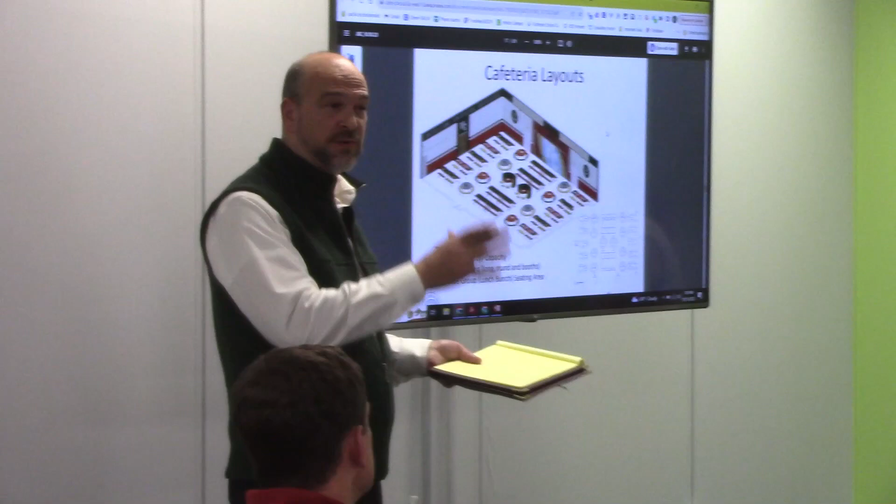I would propose that this is a larger discussion because you're talking about equity and consistency throughout all the schools, and it's really a much larger discussion than just the one school. You're going to be heading down this road of doing layouts, asking the furniture vendor to lay something out based upon how you'd like to do it in all of the schools. So we just wanted to promote some dialogue about that and give you a chance to think about it as you move further down the line.

All right, so next steps - obviously we're going to refine our building elevations and the 3D model that we have. We're going to continue to meet with mechanical, electrical, plumbing, and review sustainability items. They will be here at November's meeting to present their designs, like we've done with the site and the architecture. We're laying out the structural grid, and now that we have the massing set from tonight, we'll be able to have a preliminary design for structural members. We've started to talk to Harvey on what is most cost effective.

And we're just continuing to develop those documents. I think the 12th of November is our deadline so that we can meet an estimate provided to you for the December meeting. And we're going to start outline specs for materials, finishes, flooring, cabinets, etc.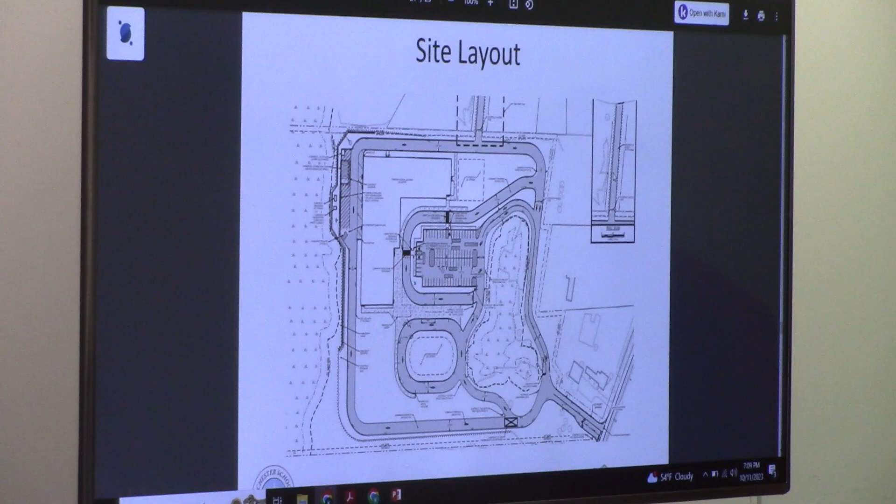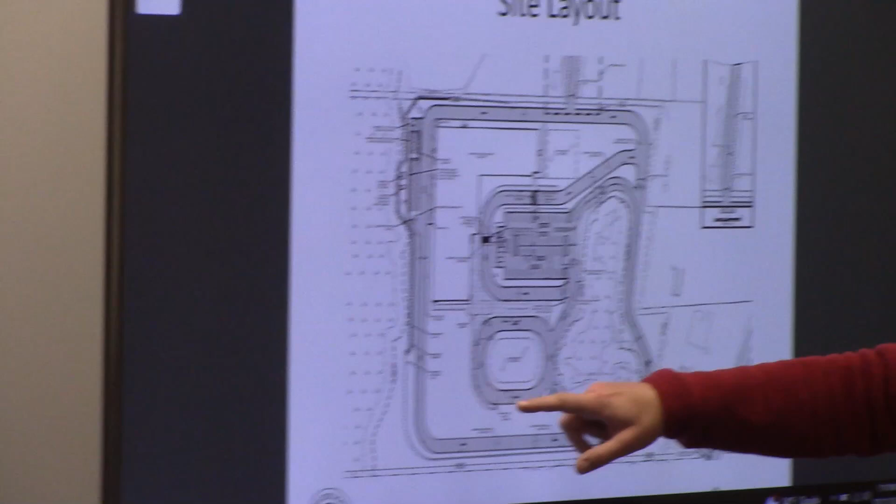I know you've seen this before in some regard, but the site layout we chose had a full separation of bus traffic and parent queue drop-off. So the intent here would be to have parents come in and hit the queue line and go all the way around the building to hit the front entry and do drop-off in this area here, where we have this extended island outside where you had your extended pergola or overhang. And the buses would enter the same way and come in and do a loop and drop off along this sidewalk and in that extended island. So with regard to safety, that's where we landed - to have that separation and functionality of the site. It just worked out really well for the site constraints that we had for this particular site.

You can see the site's relatively confined, but we had some good opportunity up in this area for potential playground area. And we have some nice green space down in this corner here, which is a nice size for some play fields or recreational use. During the school day, when we don't have any bus traffic in this area, it's intended to be a 'do not enter' from this side, and we could gate off any access here. This could be either playground, additional rec space, or paved space for kids' use. And when we come into the site, you're going to have some green buffer space area to provide that sort of block to the building parking lot, so you have a nice view block there.

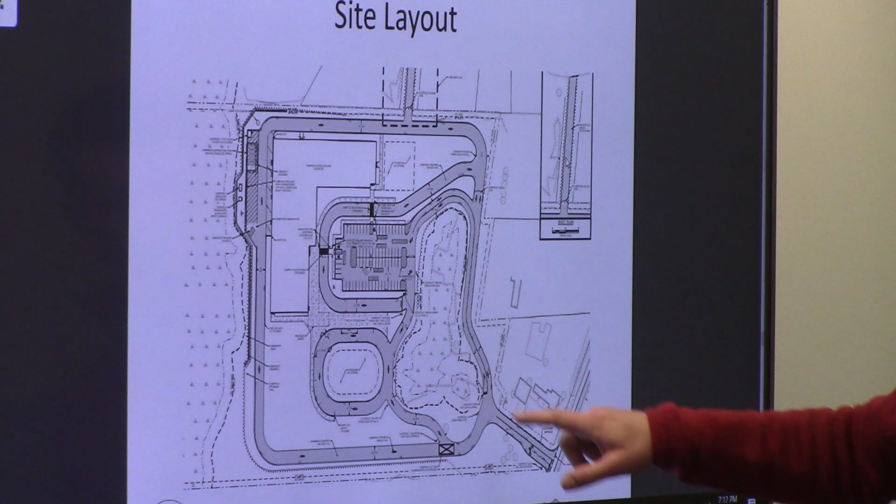Alex, how many buses can fit in the circle at a time? We can accommodate 8 spaces - 8 spaces, so they can all fit in the circle, parked, waiting. The flow in and out - there's 8 buses that can fit in the circle. We stack buses along this, where the sidewalk starts here, and they just loop right around, and then they exit and block around this way. So it won't be blocked for their exit, for the first bus to get out. Yep, and this circle is designed so that if this bus wants to leave, and these are all parked, it can accommodate it getting out. So there's plenty of space there for that. Thank you.

Paul? Kyle, could I ask you a question? I'm going to put you on the spot, if you don't know the answer, it's fine. Relative to size, McClellan, Chamberlain, how many buses typically go through there in the morning?

Would you know that? Depends on the school, and a lot of times, like on the east side, there's staggered drops. So let's say 3 or 4 buses go to McClellan first, and 3 or 4 buses go to East Rochester first, and then they swap. So Ms. Perkins and the bus company figure out their 3, 4, and 5 go to East Rochester, and then 6, 7, 8 go to McClellan or East Rochester, Chamberlain, and then they switch. So 8 is the maximum number of buses we forecast being at this school. Doesn't mean they're all going to be there at the same time. So it's got the capacity to take what we think is going to be there all at once.

Thank you very much. Thank you.

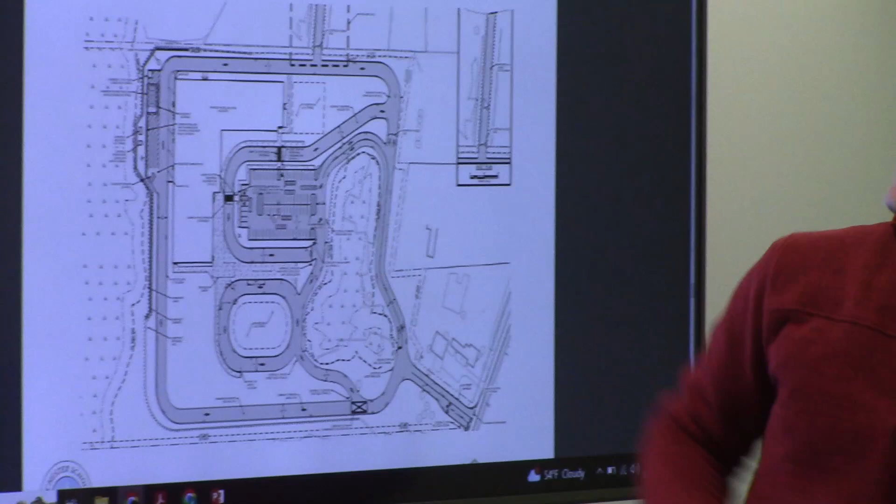So just to quickly run through a couple more features here. Obviously, staff and faculty parking here. We have some nice at-grade crossings to hit the entries, so they have a nice defined path to the building entrances through the queue area if it's busy at the time. Also, there's loading and utility space back here where we've accommodated some additional space based on coordination with the district for shed storage, potential propane area, generator, transformer, hydrant, dumpsters, et cetera back there.

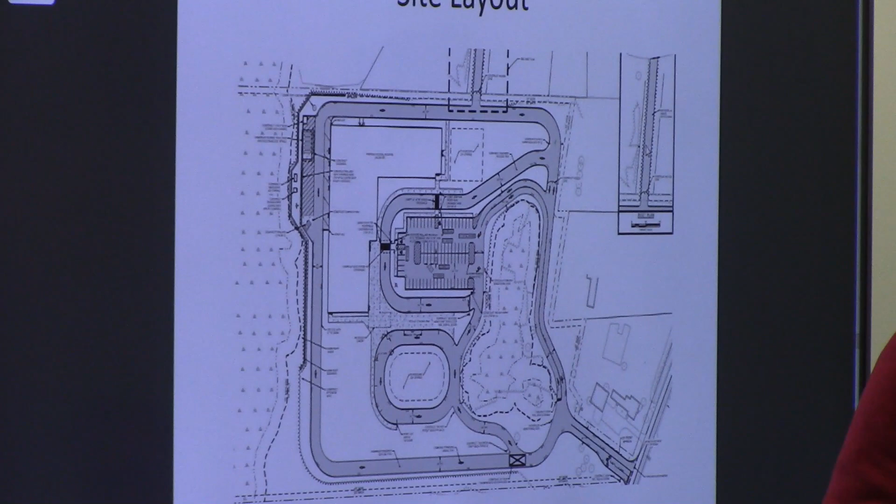If there's any more questions? Is visitor parking closest to the main entrance, those spots that are parallel to the drive? We haven't identified that yet. We certainly, as we're progressing, can add that in there.

Any questions, Matt? Just on the parking in the center, I don't know if you have it on different sides, the number of parking spaces we'll have, 71 I believe is where we landed, and that will match what we need for that building. Yeah, we were targeting around 70.

So the next slide here just shows our queue layout. We've accommodated 275 parent drop-off spaces. So this is all the cars, if they need to, off the street, not affecting bus traffic. This is a big ask for the site, and this is how we're doing it. So the queuing starts here, double stack, avoiding any at-grade crossings, and looping the entire site back to where we have the buses enter their separate location.

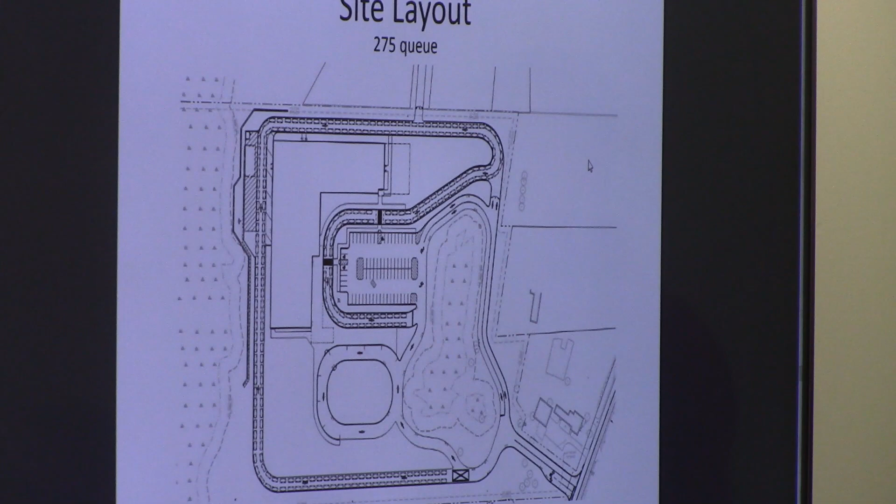Quickly, grading and drainage - this is where we've spent a lot of focus the last couple weeks. We're intending to, because we have such a developed site at this spot, go underground with our detention, and we're detaining and pre-treating, providing a proprietary treatment system which is accepted by the state for their AoT requirements. So a lot of that's going to be contained under our field here.

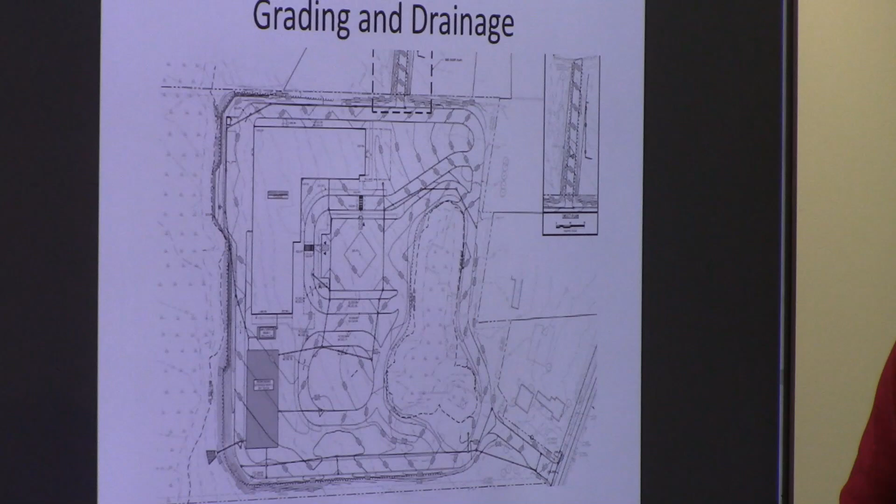Sometimes there's concern about putting it under pavement, but by having this large field here, it really gives us some flexibility to have a nice space so it's easily accessed with a road, but at the same time we have loam and seed on top as our surface versus pavement with cars parked on it. So we're going to take advantage of some large diameter aluminized metal piping, which is somewhat newer technology. It's not your corrugated metal pipe system that you see failing a lot, so it's a little bit different - it's got a nice coating, and has some nice history to it so far.

So this site provides a lot of relief from this angle, this side of the site to that side. So we have a nice fill area here where we can maximize our diameter of pipe, allowing us to take advantage of that product and maximize our cubic footage, or cubic foot price, for that storage. And then we're doing all of our treatment with a proprietary device and discharging to the wetland down in this corner here.

Is the parking area going to be porous pavement or regular asphalt? It's regular asphalt. With this site so close to wetlands, porous pavement would be a difficult sell because you're required to have a large depth of gravel and storage underneath the parking lot to accommodate that. It would be difficult to fit that section into our grading scheme, otherwise we'd have to raise the site.

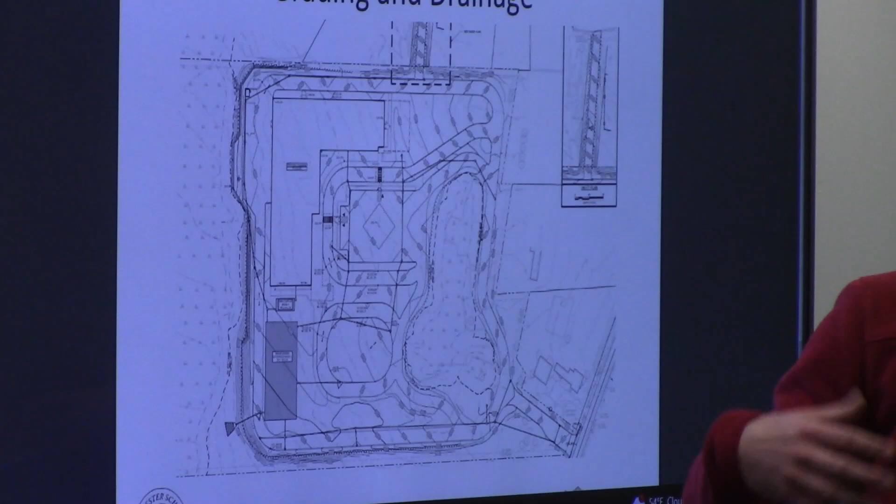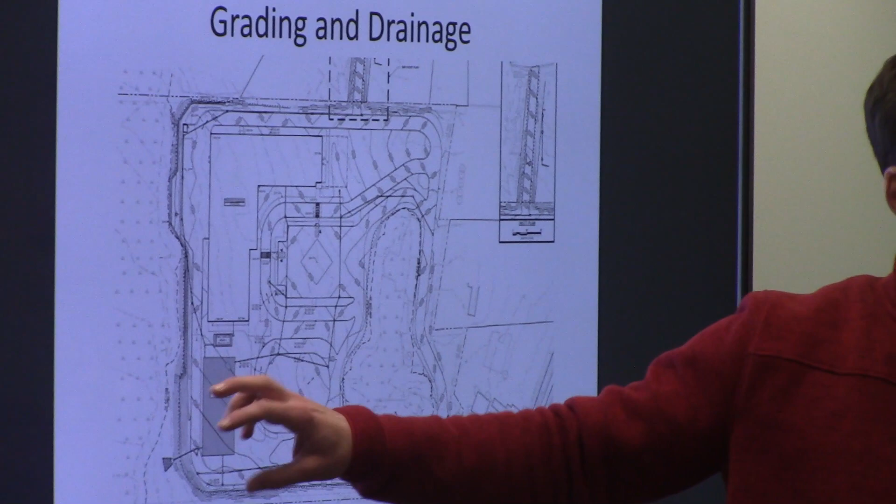With your detention system in the field, is all that water going to be funneled right toward our property next door, into his backyard area? Our site boundary is here. For state permitting we're required to analyze the site in the pre-condition versus the post-condition. The pre-condition has two points of analysis: one is this wetland at the corner, since the existing site already drains that way and that corner gets 99% of the site's flow anyway. The other is the Salmon Falls drainage system, which handles only a fraction of the site. So we're just matching and mitigating flows to the corner that already experiences the majority of the site flow.

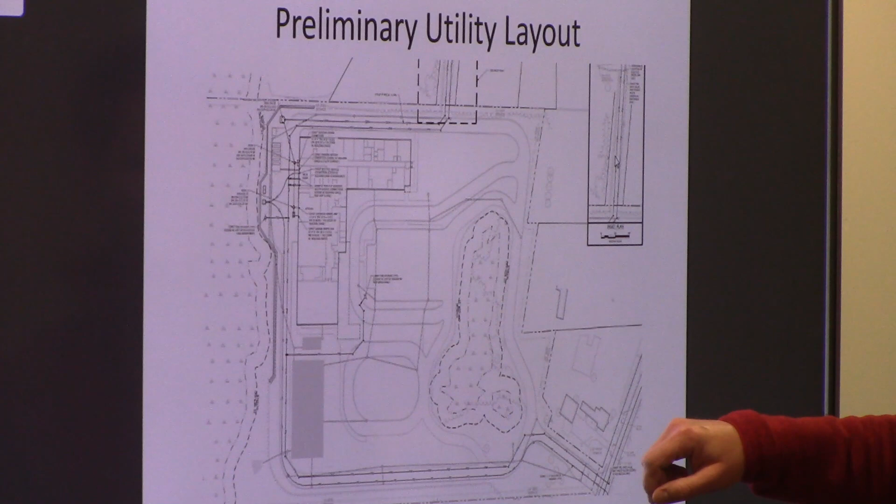This is a preliminary utility layout. We still have a lot of work to do with Banwell and our MEPs to finalize this, but our water and electric will be brought from Salmon Falls Road and loop around the site near our detention and mechanical rooms in the rear.

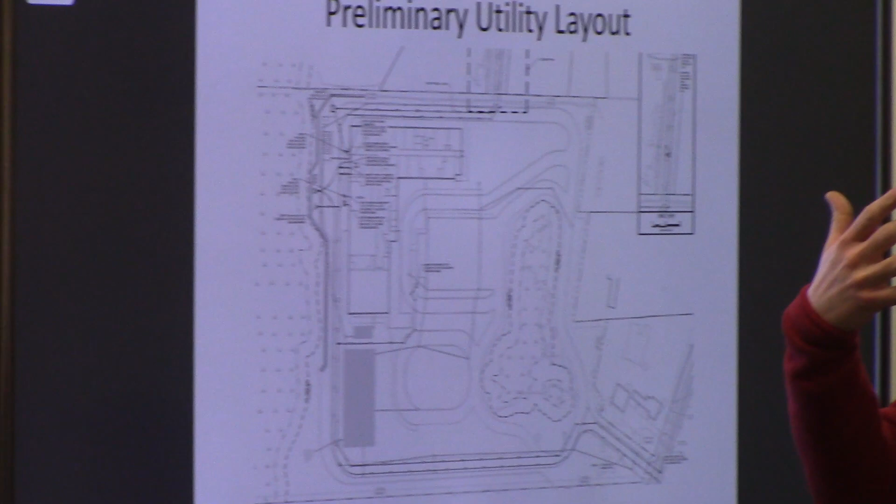We intend to work with the city to come up with the best solution for water routing. Right now we're intending to loop our site through our easement to Ida Circle to make a nice loop connection, so we don't fail on one side and lose access to a water line — benefiting both properties. Otherwise, we're intending to gravity flow out to a sewer pump and pump up to that same connection on Ida Circle.

I assume all the plans go through the city's TRC technical review. My question is, has any thought been given to how, when all 275 cars are queued up, you'd get an emergency vehicle in there — a fire truck or ambulance — into the site? Is there a plan for that? That's something we have yet to meet with the fire department on. We intend to do that next month, November 8th, right before this next meeting, when we plan to have the police chief, fire chief, and public works all review these things from their point of view. Thank you.

I brought this up last month and I'll bring it up again — we are right at the 25-foot wetland setback, and we actually have a 50-foot wetland buffer, so I'm not sure how much we're allowed to encroach on that. I spoke about this briefly with the head of our planning department a couple weeks ago, so you might want to check with them on the implications. I'm not well versed enough to know what those implications would be, but I'd suggest talking with them. Also, with a lot of buildings going in close to or encroaching on the wetlands, they're asking for a lot of mitigation to be put in place, and there's very little space to do any mitigation here, especially when you're already pretty much at the 25-foot setback.

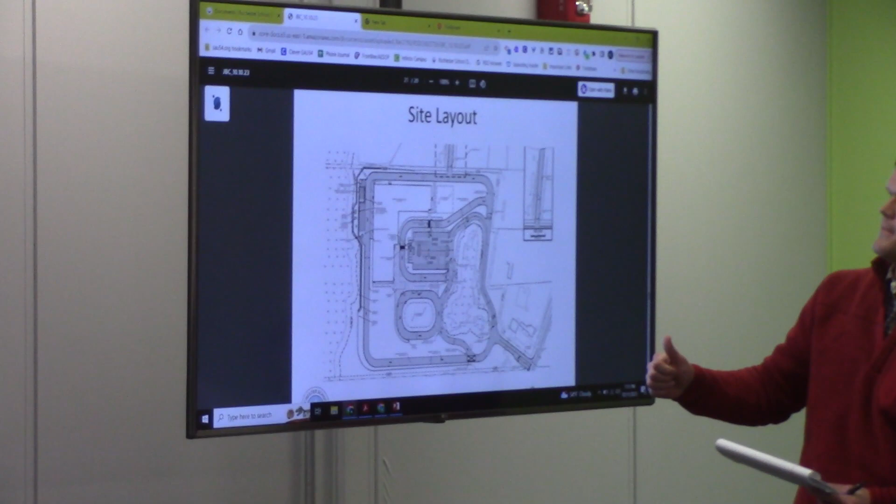Thank you for bringing that up — if we could quickly go back to the site plan. As you can see, we're right on the 25-foot line, this bold dashed line here. The regulations we're following with the city require that we don't have any grading changes within this particular type of wetland buffer. I don't have that exact reference on hand, but our intent based on the regs is that we're not grading within the 25-foot buffer — that's why we have this wall. Otherwise we could save some cost by removing the wall and just grading out, but we're protecting that 25-foot buffer at all costs. There are some areas where existing conditions will require us to make mitigations within that buffer, but only because we have to mitigate something already existing — previous conditions like sheds, etc., already constructed within the buffer.

So as far as we're concerned, we're doing this within the reg of the city.

Thank you. Paul? I'd like to go back to the treatment system. You said this is accepted by the state, you've used it before? Yes. Did you have any forecast on maintenance cost?

I'm assuming it would be Mr. Toddy's budget that's impacted by this, and we'd have to build that into our 5-year plan. So do you have any kind of dollar amount tied to the maintenance? At this point, no, I don't have the dollars to it, but that's certainly something that we can help Mr. Toddy develop through the process here. That'd be great. Yep, you got it. Thank you.

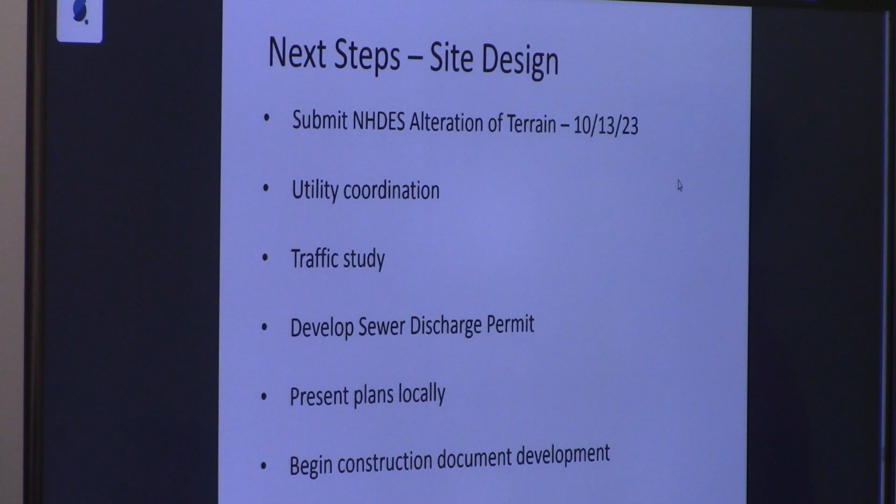And in that interim period, we are waiting for our traffic study on the 27th, which was almost 2 weeks ago. That we did the traffic counts. The data just came in beginning of this week, so they need another 2 or 3 weeks to finalize the study. Then we'll have some direction from that point, and then we can coordinate with the city and develop the construction docs.

Any questions or comments? Alex? On the alteration of terrain, how particular do you have to be about what's going to change with the permit, and is there flexibility to adjust after the permit is issued?

Yeah, good question, Matt. So they're particularly focused on where the water's going and how we're managing the water. Everything else, as long as we've accounted for the appropriate amount of impervious surface, that's what they focus on—impervious surface versus pervious surface, grass, et cetera. As long as we're accounting for the appropriate amount of that and directing it to where it's going, this site's easy, it's all going to mostly one place with that regard.

So we have some flexibility to make some small changes as we go. But as far as any major layout changes with roads, et cetera, that kind of thing would have to go back to an amendment. Any other questions or comments?

Thank you very much. Next is our owner's representative report. Mr. Bristol: thank you, and a couple of things that have gone on this month is we have prepared for both the SAU and your town administration the cash flow projections for the next 18 months on this project, so they have those now. We promised those last month.